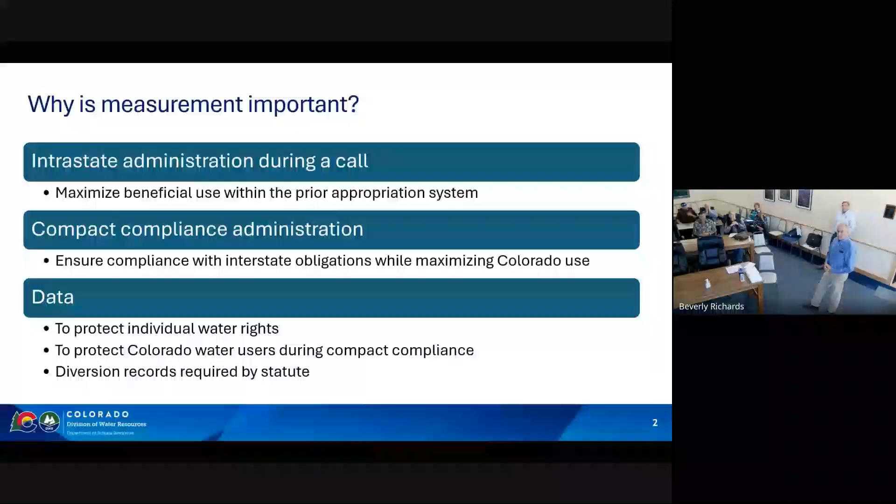So one question, I participated in most of the meetings in Division 7, the stakeholder meetings we did. And one of the questions you get is, you already have the authority to do this, right? So why do we need measurement rules? And yes, that's true. We can issue an order to somebody to install a measuring device. The statute in this section 37-84-112 directs that owners are responsible for installing measurement on their devices, on their diversions.

If they want to take water from the stream, because water is a public resource that's dedicated in the Constitution, that you get a right to use. But the thing is, in that language in the statute, it says owners of ditches, et cetera, shall erect measurement where necessary. And so this measurement rules process is trying to help define, in a consistent way, where it's necessary.

So that one that I just talked about, when or where is measurement necessary? In some of our divisions where we have groundwater measurement rules right now, like Division 1, which is the South Platte, Division 2, the Arkansas, Division 3, the Rio Grande, that where necessary has been answered for decades, because we have compacts that we do administration. We have very tight administration that occurs all year round. And so measurement has been required, and so we have more consistent measuring.

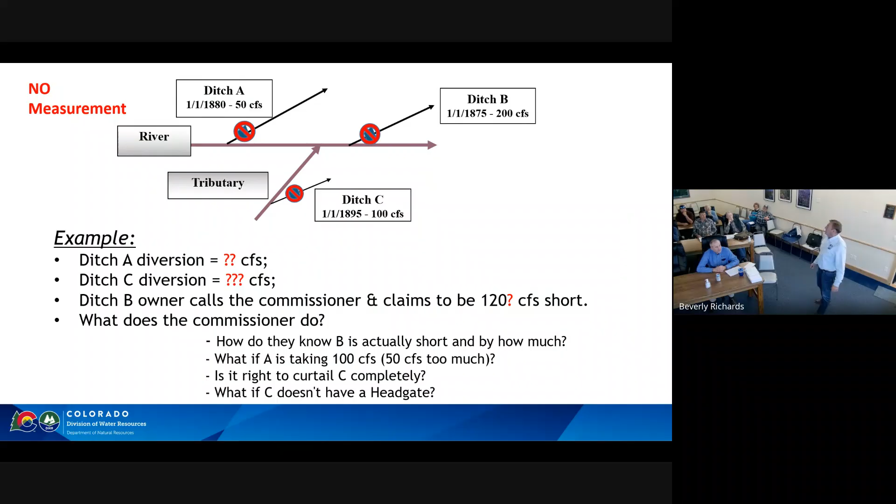To place a call, there's a standard for that. You need a lockable, controllable head gate. You need to be taking all the water that's available, and you need to measure. So you can't administer what you can't measure. Okay, so in this case, we'd say, I'm sorry, put in a head gate and put in a measuring device, then we'll talk. So go to the next slide, please.

What we could do in the past, and you've heard Jason mention this, what we would normally do is we'd write an order. I would write an order from my desk that says something to the effect, based on the statute you saw in a previous slide, 37-84-112: thou shalt put in a measuring device by a certain date, or we will curtail your water supply and we won't deliver any water. So we can shut them off.

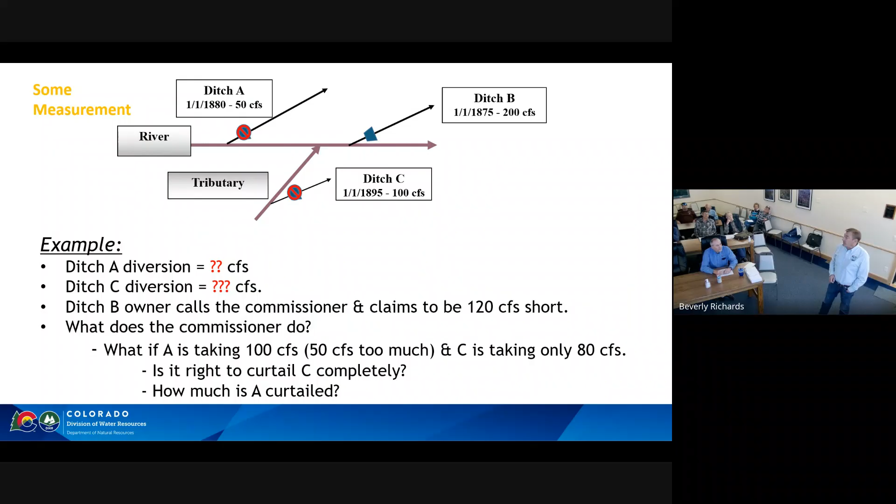The main point is that Ditch B is placing a valid call. It is conceivable that we might curtail these completely and then start letting the next guy in line start taking some water, to the amount that their water supply is available in the stream, but that's not efficient, and water commissioners are going to get a little grumpy in that kind of a situation. Next slide, please.

All right, everybody's playing ball now. Everybody's got a head gate. Everybody's got a measuring device. What a valid call by Ditch B. Now it's game on. Okay, we have 100 CFS water right at C. We have a 50 CFS water right at ditch A. So we're going to start curtailing C to the extent that B is satisfied.

You've got to have a measuring device and a lockable, controllable head gate. These measurement rules are really another way of getting to the point we need to be at on these streams, in lieu of writing orders, because we can write orders. You might hear a question: what if I don't put a measuring device in? Will you shut me off? Sure, that's an absolute possibility.

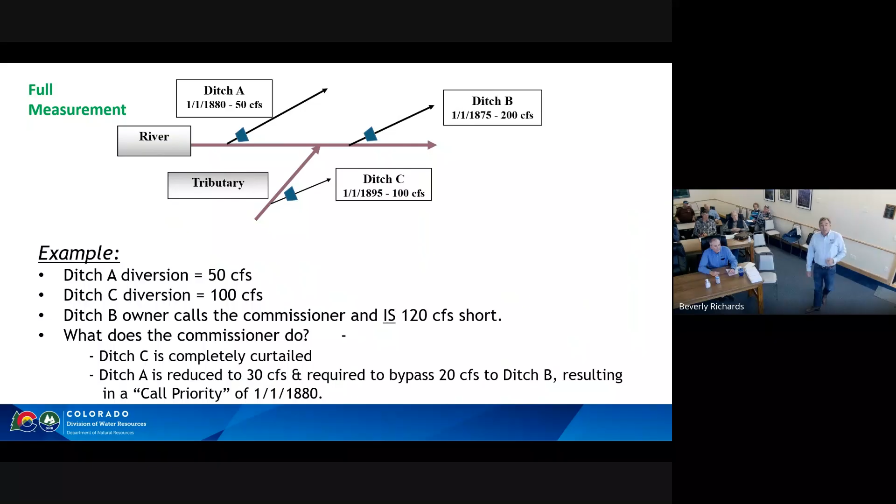So what do we need? We know your decrees. Our water commissioner is very familiar with who's on the stream. Every water right has a name, location, amount, dates, and uses, at a minimum those five things. If it's an irrigation water right, we need to know what that was decreed to irrigate—is it this 80 acres over in this quarter section? That kind of thing, and usually it's fairly specific in the decrees. Here in the Upper Gunnison, they did a really good job historically of defining what acreage is intended to be irrigated under this water right.

So you need a head gate, something we can actually control the water supply into your ditch, a measuring device, and the place of beneficial use.

Consider this: do you think it might have happened before in history that somebody placed a call for water to make sure their neighbor got shut off, then let the water run through a waste gate because they weren't ready yet? That's not a valid call, we would not honor that call. And he's not going to get away with it for very long, because everybody's always watching and you'll be ratted out quickly. So you have to put the water to beneficial use—that's part of the administration process, part of the great things that we look at.

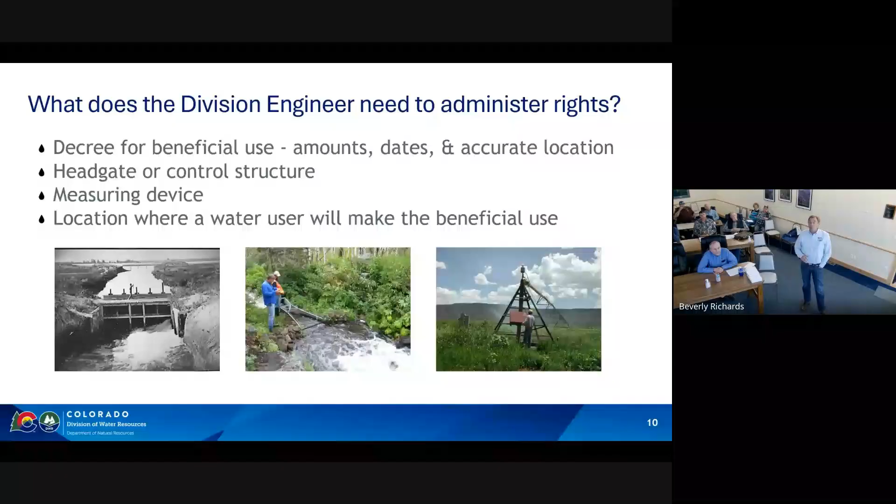So what is a functioning head gate or control structure? This is a really good one. What might be difficult to see is there's a chain hanging down from that screw handle. The way we'd lock a head gate: the water commissioner adjusts the flow into that ditch until satisfied he's got the flow right by reading the flume. So here's a proper head gate, here's a properly set flume, and that's a good setup right there. Then he'd run the chain through this structure and lock it, so you can't turn that wheel, you can't monkey with it.

Every stream system was settled differently, developed differently. Some stream systems, the water users get along pretty well and everybody's fairly honest, so we might not lock head gates on that stream. But another stream, maybe they don't get along that well, and we have to lock them all—it's pretty much one strike, you're out. If a water commissioner sets your head gate, puts a head gate notice on it, and it gets monkeyed with, there's no three strikes you're out. No, you blew it and you're going to get locked.

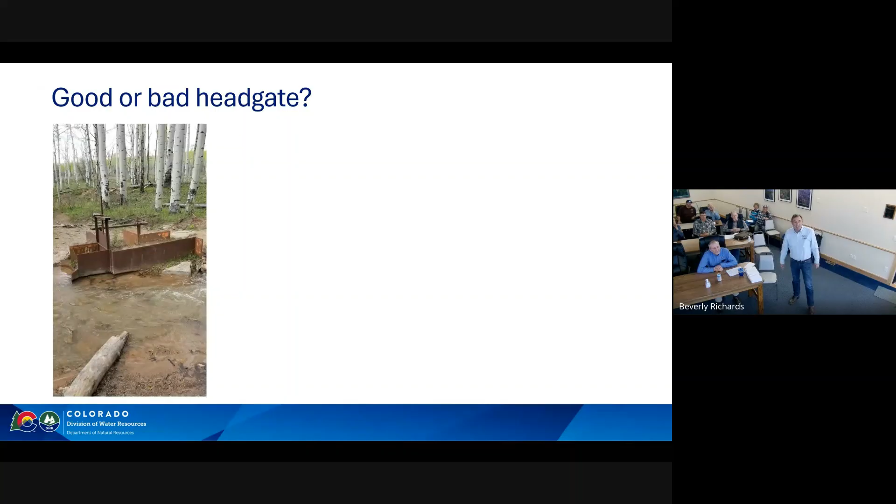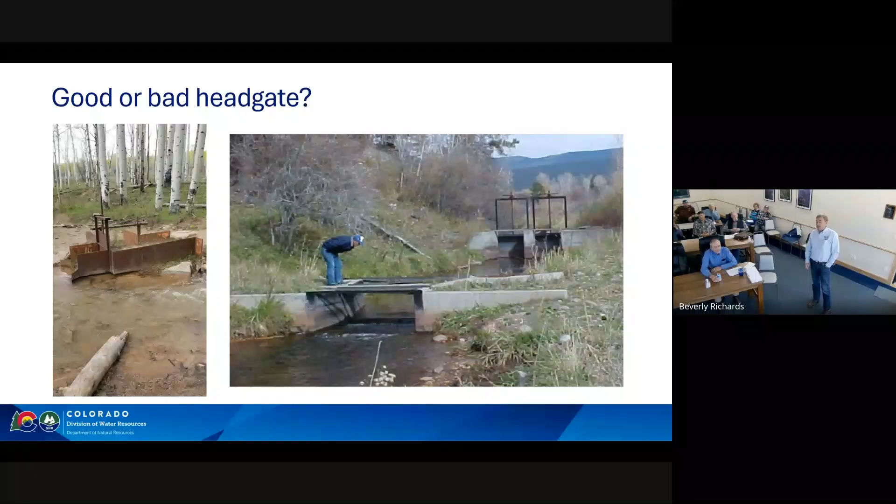Next picture please, and there's a good one. This is pricey. This setup here would probably be involved for a fairly large ditch company, and there'll be a lot of farmers being supplied by this system. What he's doing is trying to read the staff gauge on the other side of that wall. Speaking of staff gauges, go to the next slide please.

I think the next slide I'm thinking of is farther down. Okay, sorry, so take it away. Unless you want to keep going. No, you're doing great, it's fun listening to you. I don't know about that, but okay. We're trying to mix it up so somebody isn't talking at you for 45 minutes straight. Right, I have a tendency to put people to sleep, so.

These are three terms in the rules themselves. Measurement methods is the overarching term, covering all the different ways you could measure a diversion. Measuring devices is probably the biggest category underneath that. A measuring device is a physical piece of equipment, a flume, a weir, a meter that goes in the flow and has a relationship between either the velocity through the structure or the stage, like the staff gauge, and the flow rate. Alternative measurement methods don't have a defined relationship between stage and flow that is consistent. Measuring devices is the most common way people measure their flume or diversions, but there are some alternative measurement methods that are acceptable.

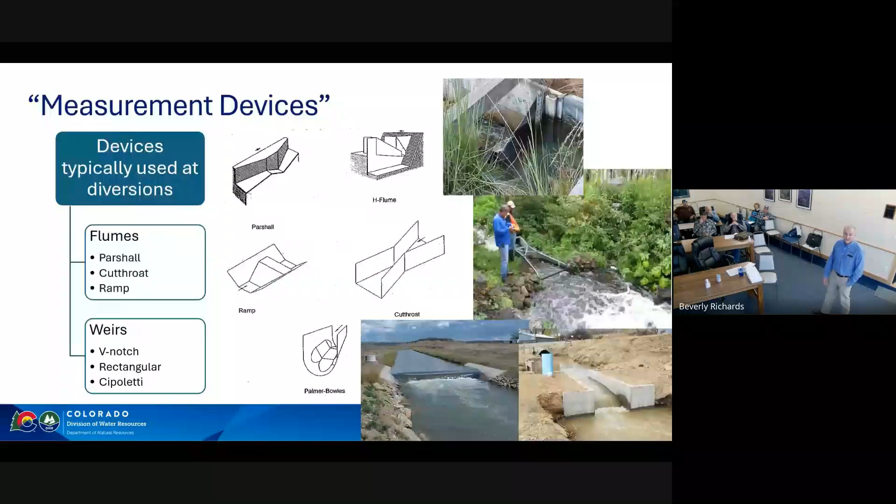Once you have your flume, and it's one of these common ones with a good rating table, it doesn't work so well if it's not properly installed. So the measurement rules address proper installation and require it to be maintained, because this one might not be measuring all the water going through it, or might not be measuring any of the water going through the flume. They need to be installed properly and maintained. Sometimes it's just a matter of cleaning down below, because buildup can cause it to overtop the flume or back up in a way that submerges it. But the measurement rules require proper installation.

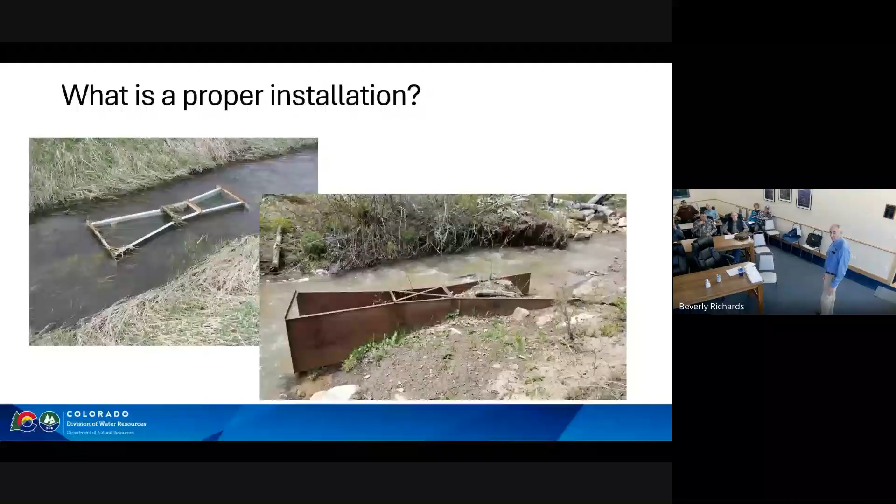So we have a test here for people in the room. The water commissioners last night answered all the questions, so hopefully you will too. Which one of these is working? The one on the right works, correct, good job. In this picture you can see a lot of water going around the flume. The working one has calm water behind it and fall through the flume. Typically flumes and weirs have to cause the water to change from subcritical to supercritical depth, the engineering term, because that's what creates the relationship between stage and flow. So if you see a flume that's submerged, that's why it doesn't work.

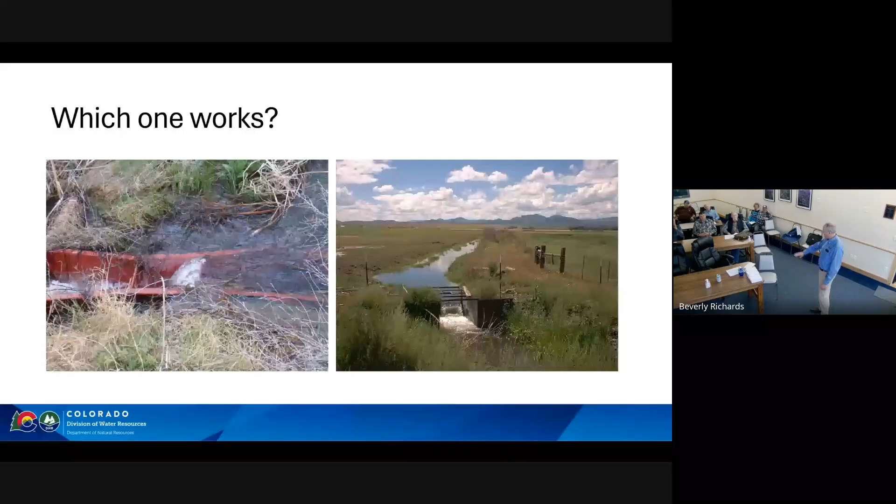Next slide. So which one here? The one on the right. Yeah, okay, that one has fall through it and a good staff gauge. The other one is completely submerged and it's just like a flat ditch running through it. So, next slide.

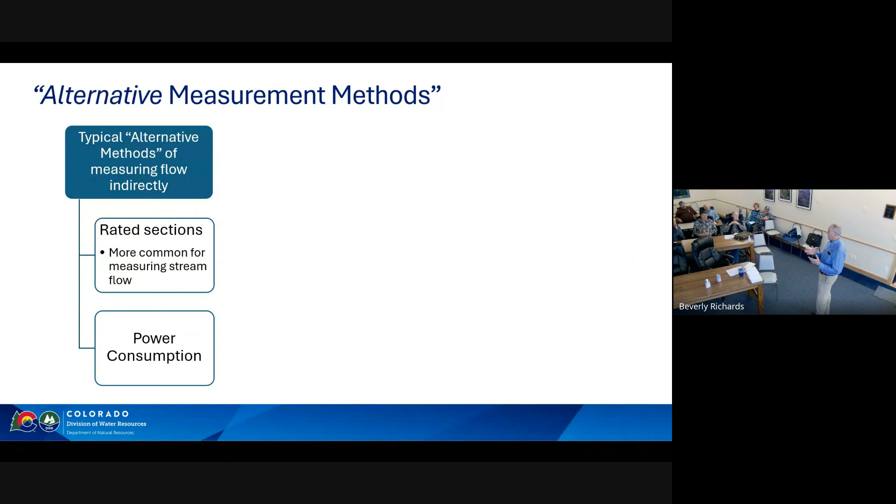So what are some alternative measurement methods that would be acceptable? The most common one is probably a rated section. Sometimes we have ditches that don't have enough fall to actually put a flume in, so in some places we've done a rated section where the user measures it many times and develops a curve of stage in the ditch equals this much flow. Usually we require that to be in a trapezoidal section or some very consistent section that's not going to change.

This is somebody out in the stream measuring the stream, and that's how we would create that rating table. It's also how we verify structures are accurate, by actually going out and measuring. So he's making one of those measurements.

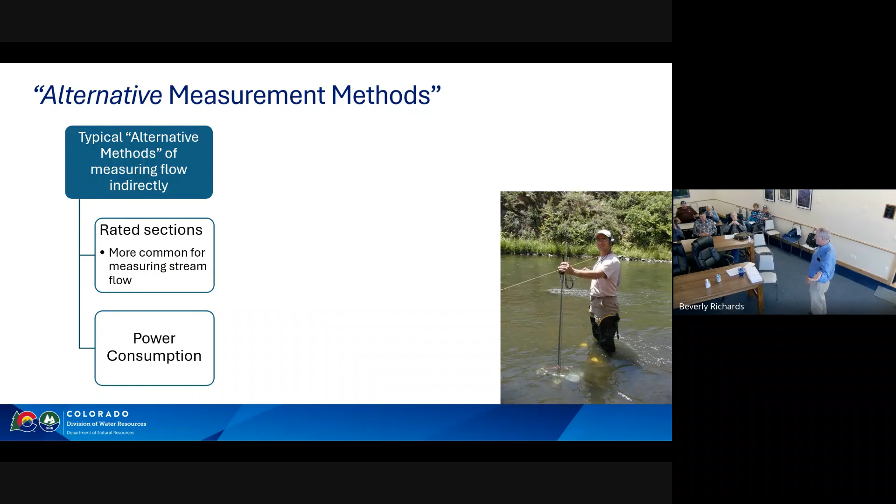So the water is at that level, he gets a flow rate at that level, and then goes out another time when the water level has changed. That's how you develop that relationship. But it's more common for measuring streams, because a lot of our streams don't have flumes on them, but it does get used on some canals.

There's the slide Bob was looking for. So here's your staff gauge. On the right, that's a nice, clear picture. At the top of the photograph would be 1 foot, so this is in tenths of feet, and this 5 actually represents half a foot.

So 50 hundredths, and you can see that line at 5 has a nice little angled tip. The top part of that black line is actually 0.5. As you cross the blank white space and hit the bottom of the next black hash, that would be 0.51. On top of that black line would be 0.52.

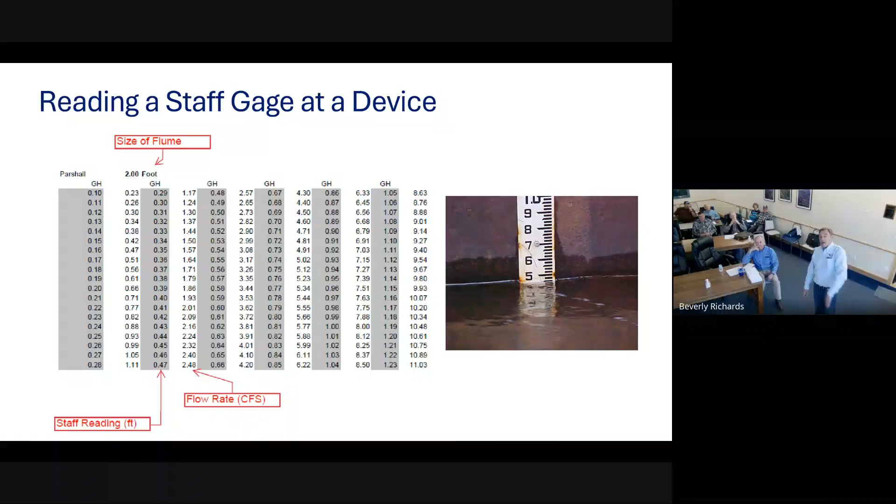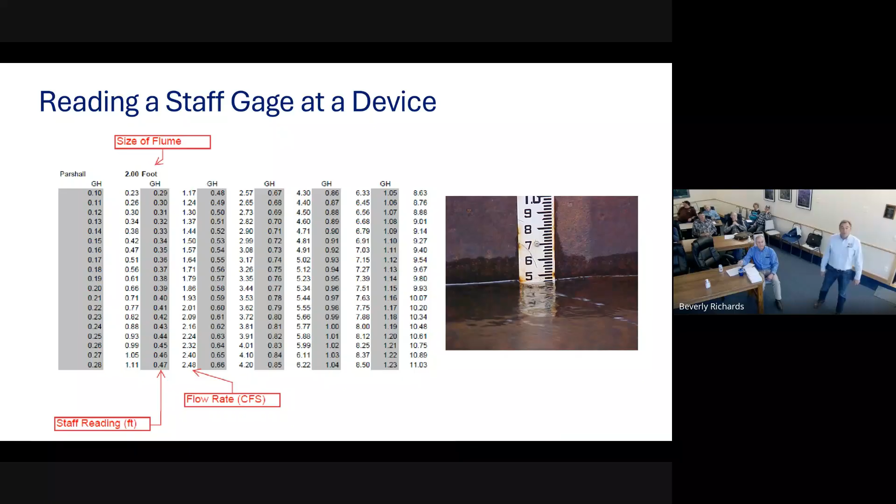So what I'd say right here is this is about 0.47, and this is a 2 foot flume. On this table, if you go down to the gauge height of 0.47, that corresponds to 2.48 cubic feet per second, if that flume is set correctly and you have proper flow through it. Jason will talk more about the accuracy of flumes and what we accept for measuring devices. Anyway, that's how you would read the staff gauge, they all work exactly the same way.

So why do we record and report all these diversions? Jason mentioned in the beginning, we're required by statute to make a record of all the diversions of water in our division every year and publish that.

It's valuable to the user because of the value of your water right. Have any of you been to Aaron Clay's water law in a nutshell training? One of the first things he says is that the value of your water right is based on the use. And how do you know how much water you've used and are consuming unless you're measuring that?

So it's very important for maintaining the value of your water right. It also protects against abandonment. You'll never be on the division engineer's abandonment list if you're demonstrating diversion records with no breaks ever.

And also for optimizing operations. If you know precisely how much water you're diverting and putting out onto your field, that's better for your operations.

As far as the system goes, the state of Colorado is very interested in protecting its entitlement under the Colorado River Compact, and being able to demonstrate to lower basin states under the compact what our use of water is, that we're within our entitlement under the compact.

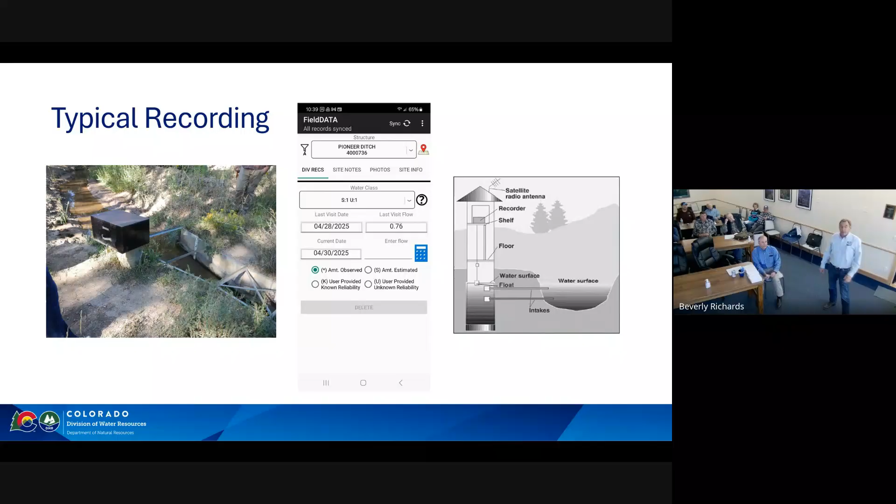And then finally, like Jason was explaining, we might have a stream gauge. There's also gauges on canals and ditches that are recording the flow in the ditch, canal, or stream 24/7. They have instrumentation and telemetry that automatically puts that into a database, and that data can be viewed with various web tools, and it's pretty transparent as well.

Next slide, please. Reporting.

Typical reporting types. Reporting is done, and that data is put into our reports in places you can access through online web tools, but it's done various ways. The brute force way is a water commissioner literally making a visit to your flume, reading it, maybe putting that in his app and getting the data up. I explained how a stage discharge recorder works, where the water commissioner downloads that data onto his laptop, and then that gets into the database. Another way is electronically, through telemetry, like the gauges installed on a stream, ditch, or canal.

Those are expensive. They require highly trained hydrographers to get them calibrated and working correctly. And then there's user supplied data. This is new for me, and it's done commonly in divisions 1 and 2, and I suppose 3 too. You can get an account, and through what's called REST services, you can log on to our website and have your own portal where you can upload your user collected data. It gets reviewed, and once it's reviewed, it gets accepted. So there are multiple ways that data gets reported.

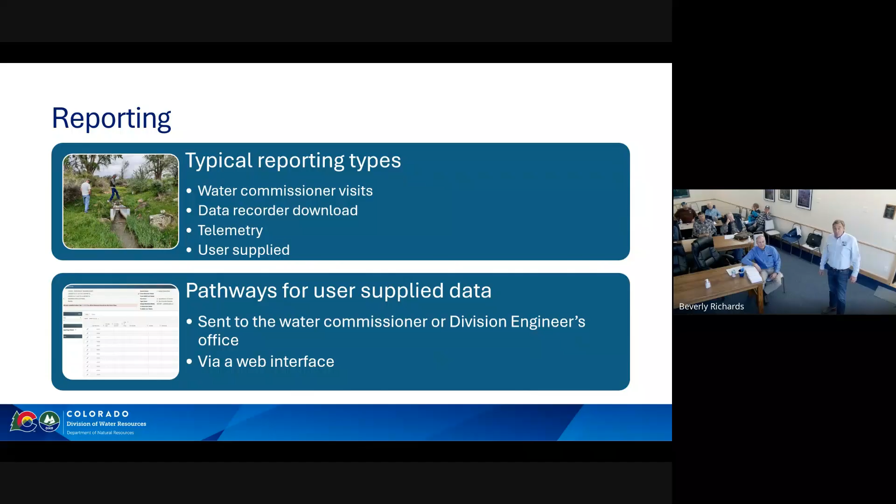I'm going to talk about the legal process for these rules, specifically the water court process. Right now we're in the stakeholder process.

Right now we're in the stakeholder process where we're going out, we're here presenting the drafts of these rules to you all, their purpose, their need. But once that's finished, there's going to be the water court process.

What's going to happen at the end of the stakeholder process is that the state engineer signs the rules, and then those get filed with the water court. We're then required to post notice of the rules in the water court resume, as well as in local newspapers, so people know what's going on.

The second month after those notices are published is the deadline to file protests to the rules. And then that sets up the whole court process.

Once those protests have been received, we're going to be asking the court to set case management orders for deadlines, things like expert reports. Ideally what we try and do—we've done this in 6 and we've done in 7, we've gotten a handful of protests—and ideally what we've been able to do is reach those through settlements, through stipulations, and that's the desired outcome.

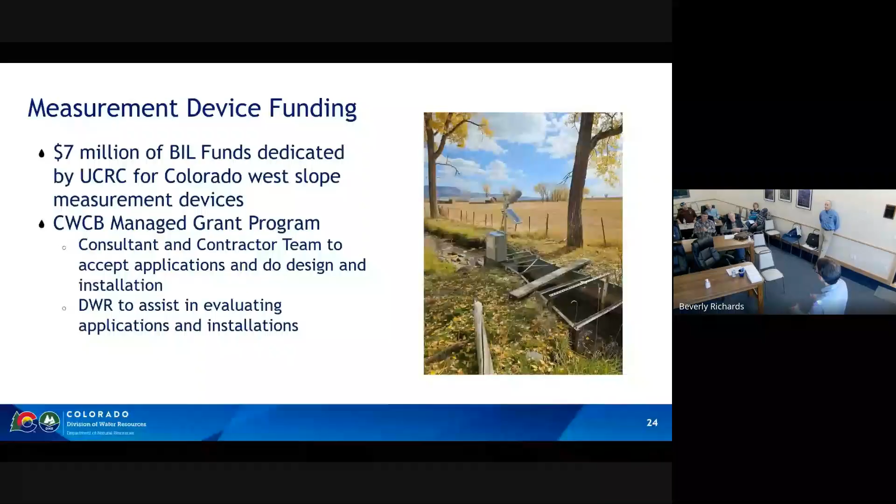The way that process is going to go is that the funds would be given to the CWCB. They're going to go through an RFP process to get a contractor on board for the installation, for the management of the project. And then we'd be doing some outreach, some advertising. People would have an opportunity to apply for the program, and if that application is accepted, that measuring device would be installed for you.

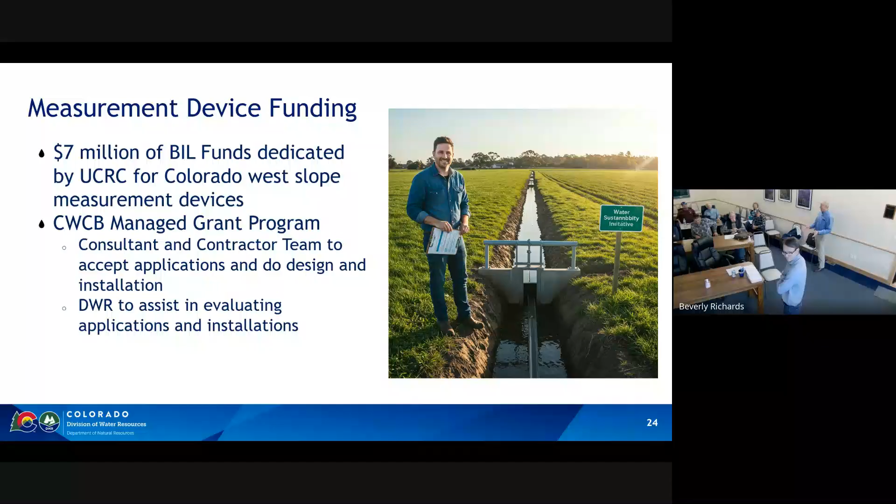And similarly, sorry, we could take those pictures out. It's kind of, it's okay.

So like I mentioned, the next steps are in that stakeholder process. This is the second one. We were in Delta yesterday, and we'll be in Norwood and Montrose next week.

We're asking for comments on the rules. Those have been posted, and Marie has a written form you can use online to submit comments. We'll be providing the contact information on the next slide. Again, I'd stress if you have those comments, do those now. We're asking for them to be submitted by May 31st.

May 31st - I think, how many days are in May. But yeah, so that way we can move forward in addressing those comments. If we're looking at those comments and thinking these make a lot of sense, we should make some revisions, we'll repost the rules and let folks know about it. But if things are looking pretty good, and we've gone through this process in 6 and 7 made appropriate refinements, we'd move forward in that water court process.

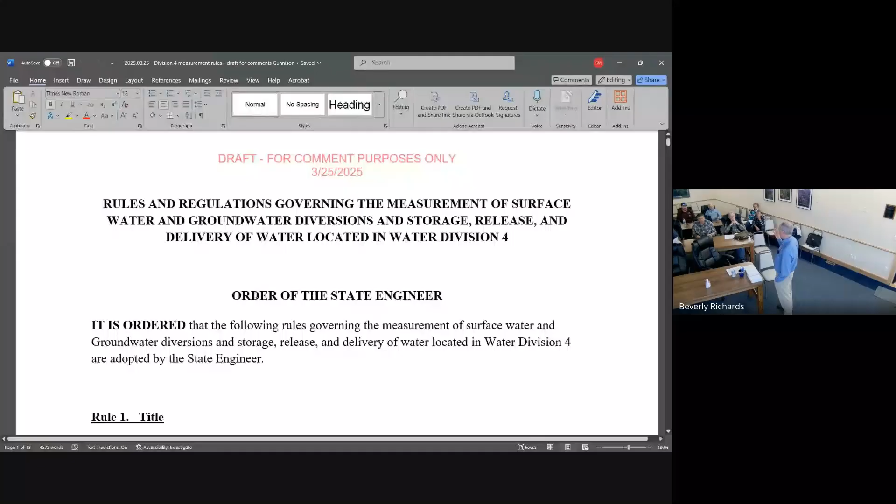We have some people here today, but I know that you probably have folks that you interact with out on the stream system that would be interested in learning about this. We would like to have as many people review these and provide comments as possible. This video of tonight's meeting will be posted on our website, so Sonia, you could share it with whatever lists you have, if they want to watch, so that they get the picture of what we're doing before they want to make a comment.

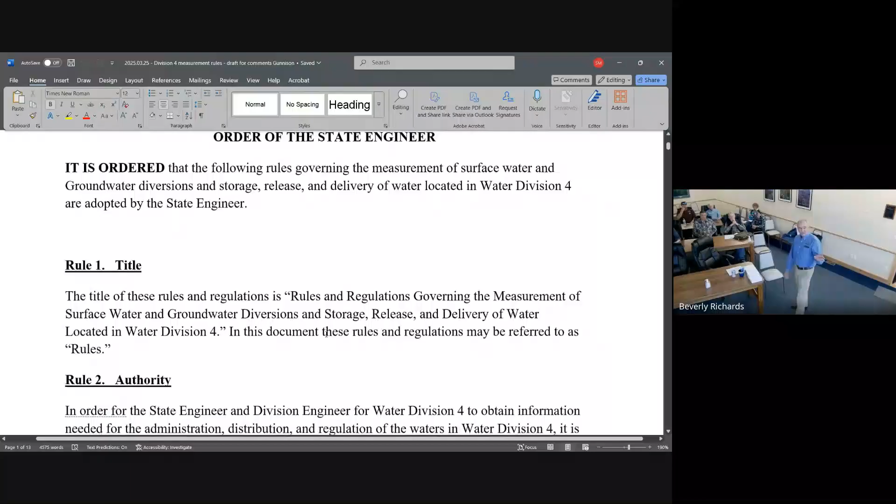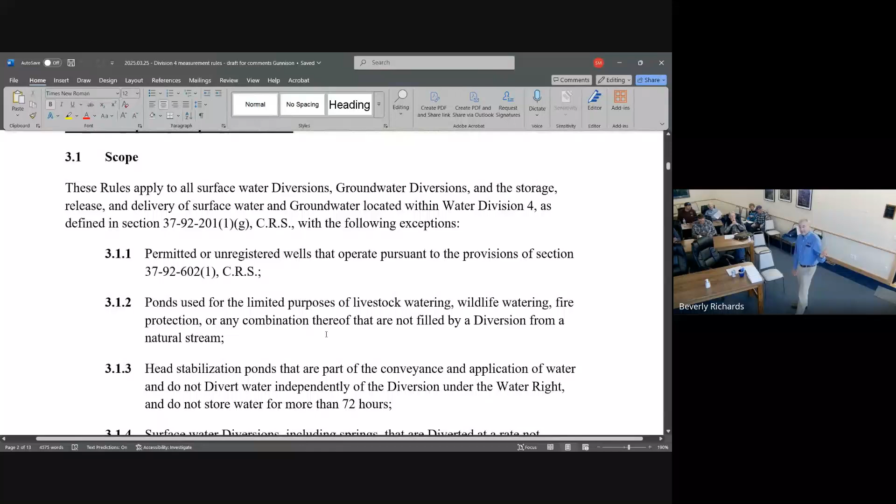Please ask questions as you have them. Don't wait till the end, because this is a good chance for you to get those questions answered or comments.

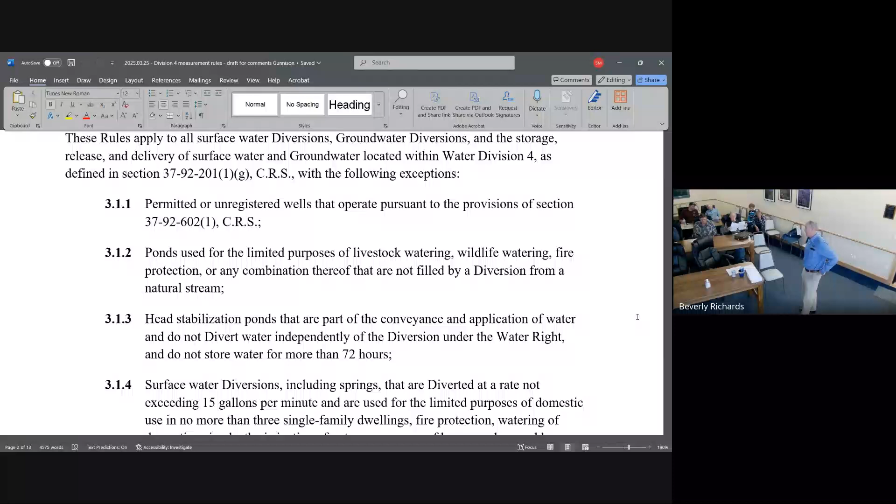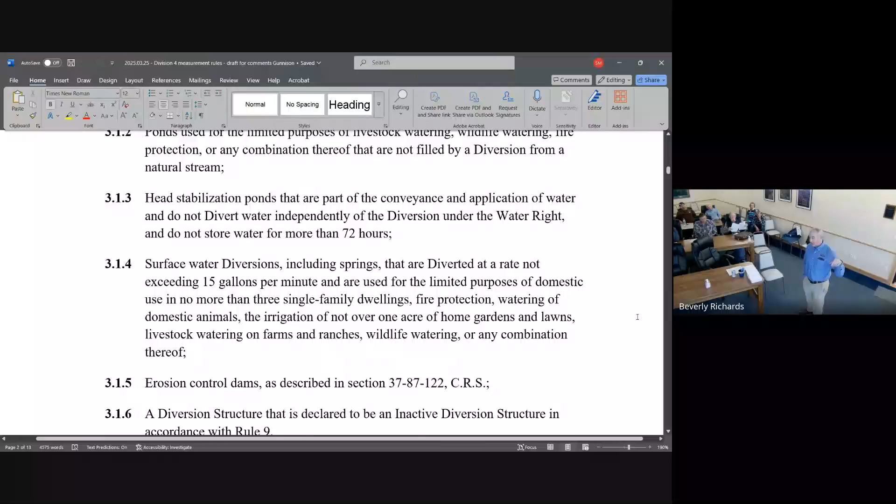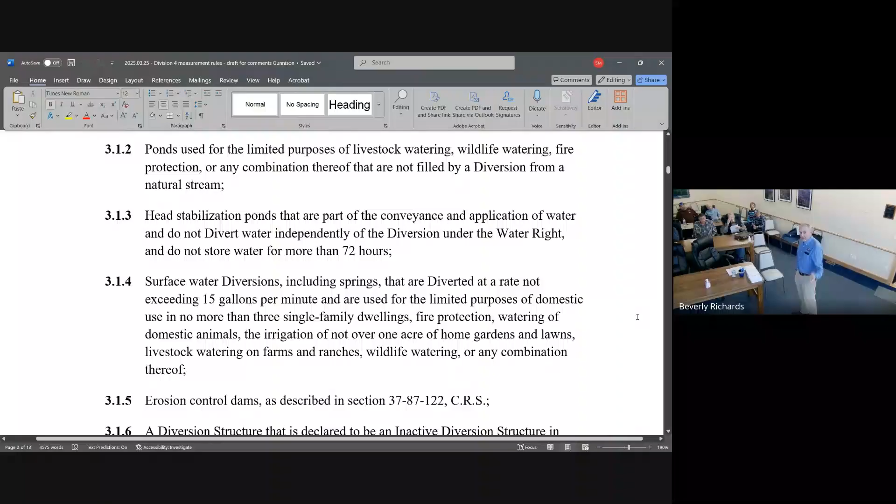3.1.1 is the exemption for exempt wells for domestic purposes. 3.1.2 is the exemption for ponds used for livestock watering, wildlife purposes, and fire protection purposes. 3.1.3 is head stabilization ponds, which we didn't talk about earlier.

If you have a pond in your ditch system that you use just to basically equalize the head, and it's part of your operations and doesn't store water for more than 72 hours, you don't need to put measuring on it to tell us what's in your equalization pond.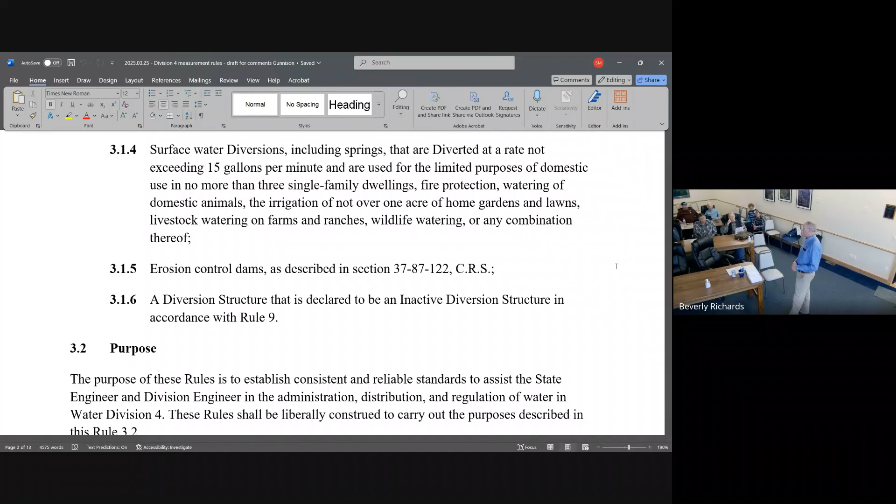Springs that are not diverted at greater than 15 gallons a minute and are only used for the same things that an exempt well would be used for - recognizing that a lot of those supplies for homes off of springs are similar to exempt wells - don't need to be measured.

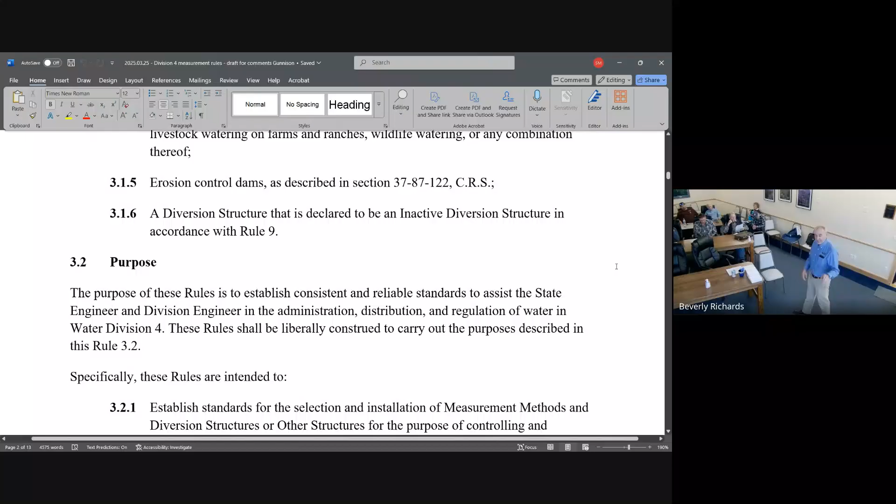And then erosion control dams, and any diversion structure that's declared to be an inactive diversion structure in accordance with Rule 9. In Rule 9, we'll talk about the process by which, if you're not going to use a structure and you don't want to get a notice that you don't have an adequate measuring device, you could file with the division office to make it an inactive structure.

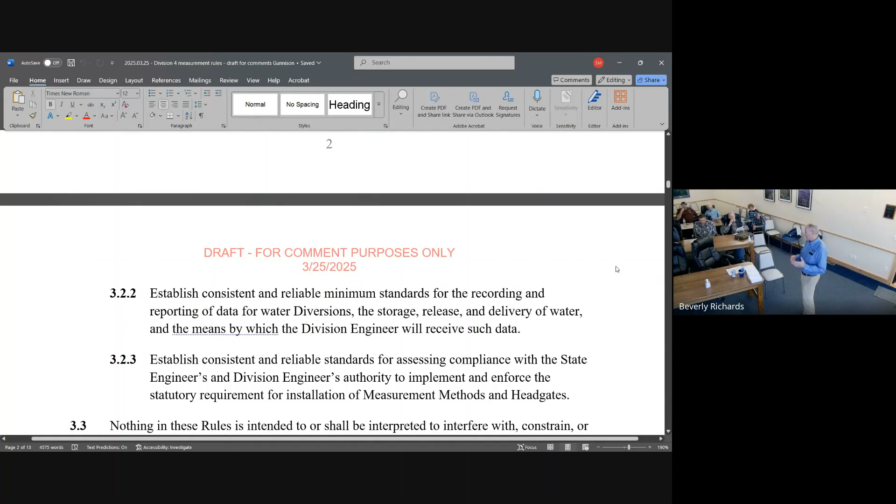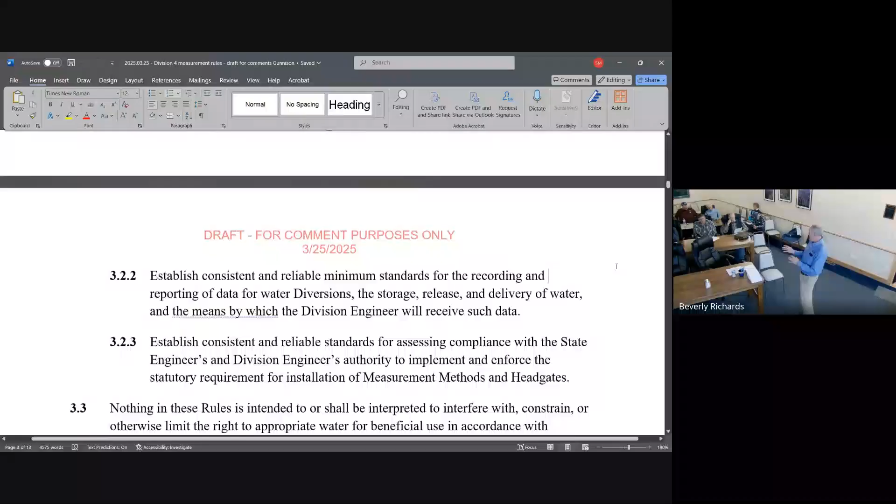So the purpose, I think we've kind of covered this, but really it's to establish a consistent and reliable standard that we go through a stakeholder process to create. So people have an understanding of what the division engineer expects you to have if you're taking water from the natural stream.

The statute gives us the authority, but it doesn't give very clear direction on what we would expect. So Rule 4 is definitions for things. We don't need to cover all of them.

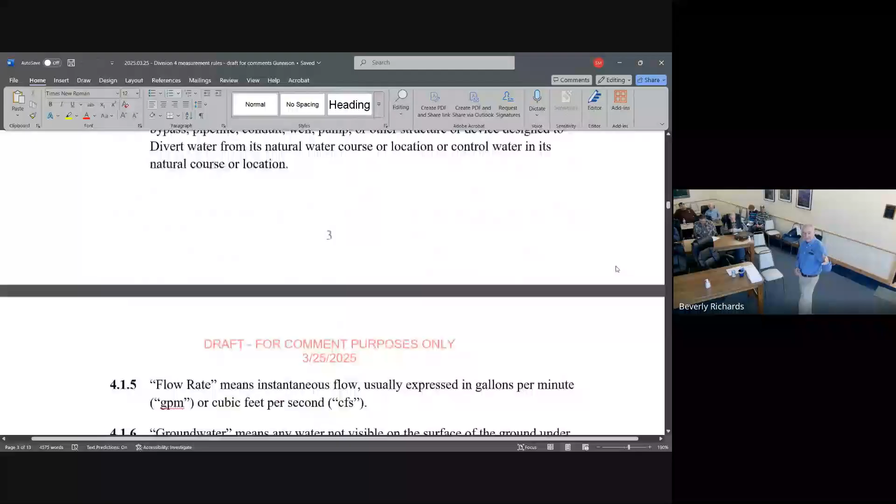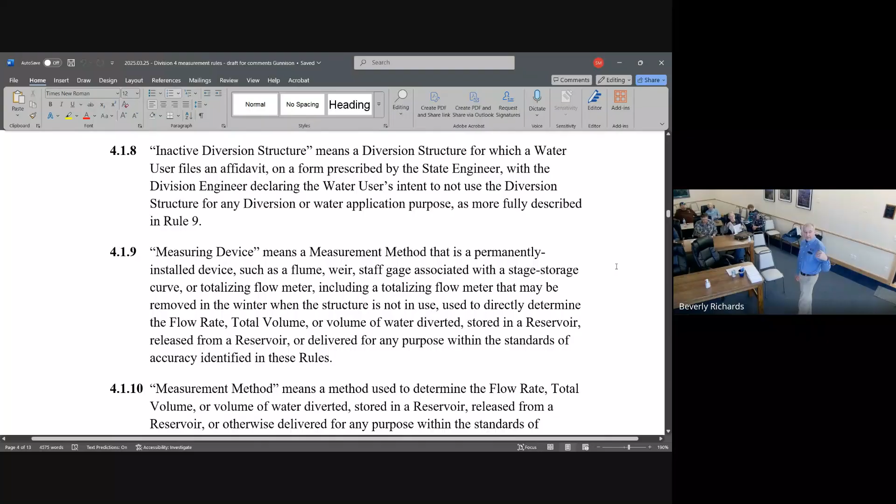We talked about alternative measurement methods. The structure is pretty obvious, the structure used to divert water. There's a couple in here. So inactive diversion structure is specifically defined as something that you have filed to be inactive. We already covered measurement devices and measurement methods.

On-stream reservoirs and off-stream reservoirs, we will talk about those in a later Rule 6.

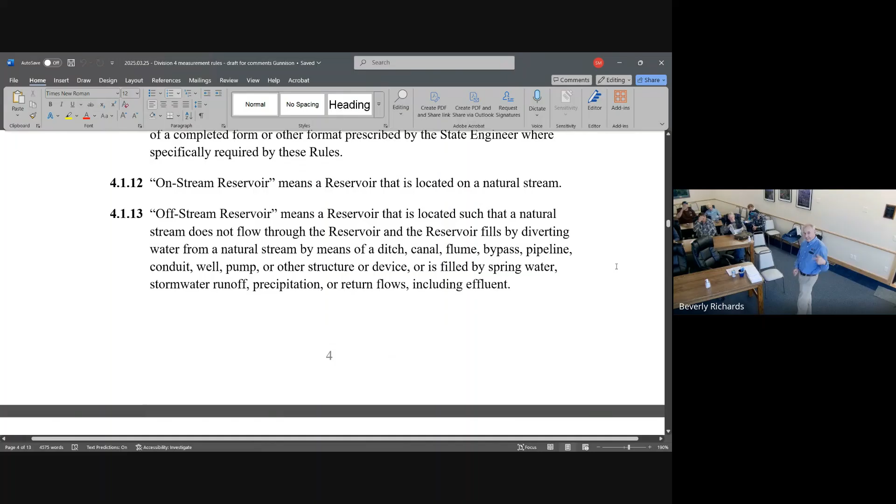So other structure is the question we had last night, related to another question we had last night. So if you have a ditch that takes water and then dumps water back to the stream at some point downstream, or there's other structures used to operate that we would need to know the amount going through them in order to administer the river properly, that's what other structures cover.

So if you have a wasteway or something that we would need to know how much is being wasted out of it. We have in some divisions a lot of augmentation stations that are required to deliver water back to the stream, and so that is kind of a nod to that too.

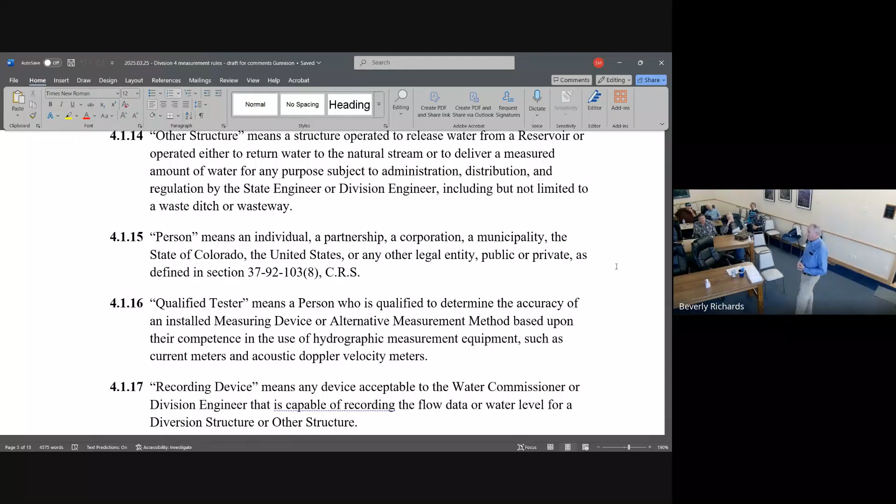A qualified tester is basically anyone who is qualified to go out and actually do what that guy in the stream was doing, and measure with a device what is flowing through a ditch or a stream.

Our hydrographers that work for the Division of Water Resources are obviously qualified. A lot of the measurements our water commissioners do, if Tom looks at a structure and says he's not sure if this is accurate, he may ask our hydrographer to come out and measure it to verify whether or not it meets the standard, which we'll get into in a second. You could also, as a user, hire somebody, a consultant, to come do it, as long as they are qualified to use those devices.

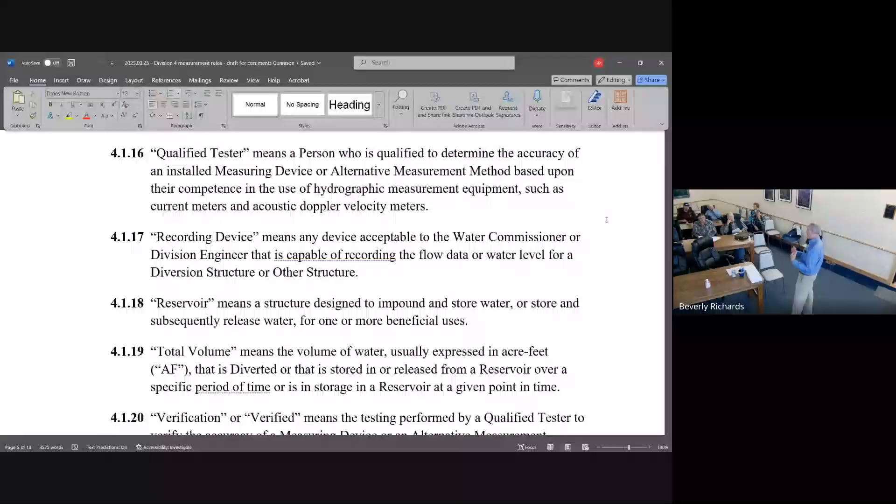We would evaluate that when they submit their measurement to us. We're not doing some certification program for qualified testers. Total volume is pretty self-explanatory for water users.

So I think we can go to Rule 5. The headgate requirements are in Rule 5. This is fairly short, but it's really important, because as Bob was stating, we can't administer water without a headgate, really.

I mean, we have places in Division 4 that I'm aware of from my time here where there's no headgate. And so people expect us to go out and shovel in their ditch when the river goes on call. Well, I don't have enough money to pay for a backhoe for all of my water commissioners.

So a headgate is important so that they can actually lock and control the flow going into your structure. So this defines that, short and sweet, that you must have a headgate that allows the water commissioner or owner, at the direction of the water commissioner, to accurately adjust the diversion of water with reasonable effort. So if your structure is pretty much stuck shut and has been stuck shut, or is welded shut, that doesn't count.

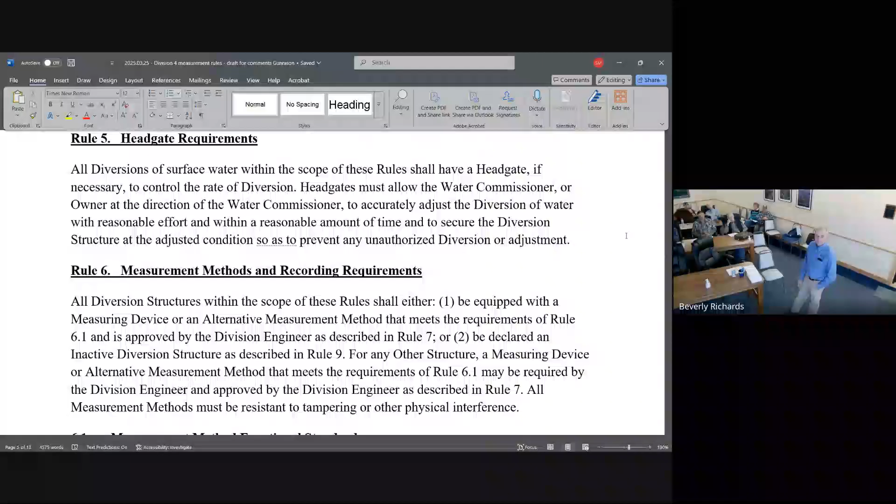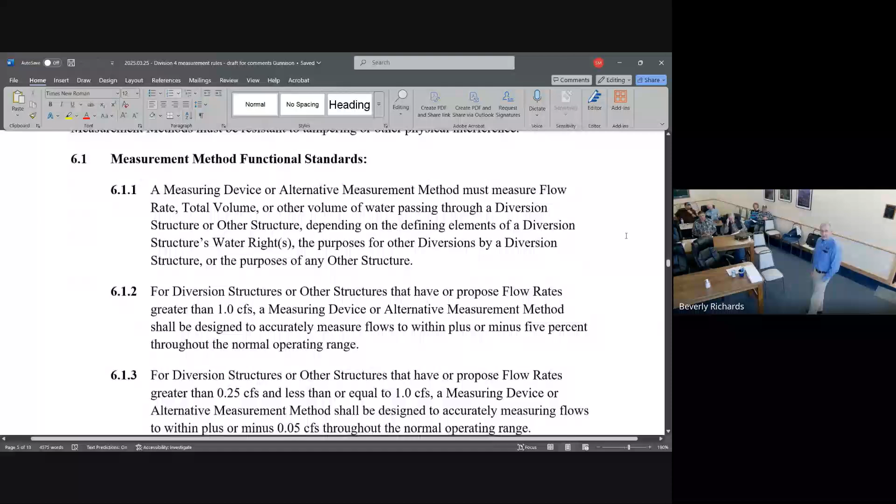So Rule 6 is all about the functional standard for these devices. What accuracy do we expect when you install a structure? Obviously those pictures of flumes that weren't in the stream are not accurate.

In 6.1.2, for diversion structures greater than 1 CFS, or with proposed flow rates greater than 1 CFS, a measuring device or alternative measurement method has to be designed to accurately measure to within plus or minus 5%. That's the standard for the best we could measure if we went out to verify your structure - the most accurate we could be is within plus or minus 5%. So that's where that comes from.

As you go smaller in device structures, for diversion structures between 1/4 and 1 CFS, they have to be accurate to within 5/100ths of a CFS. That sounds really small, but it's actually bigger than what 5% would have meant for that flow rate. That's why we changed from a percentage to a CFS amount.

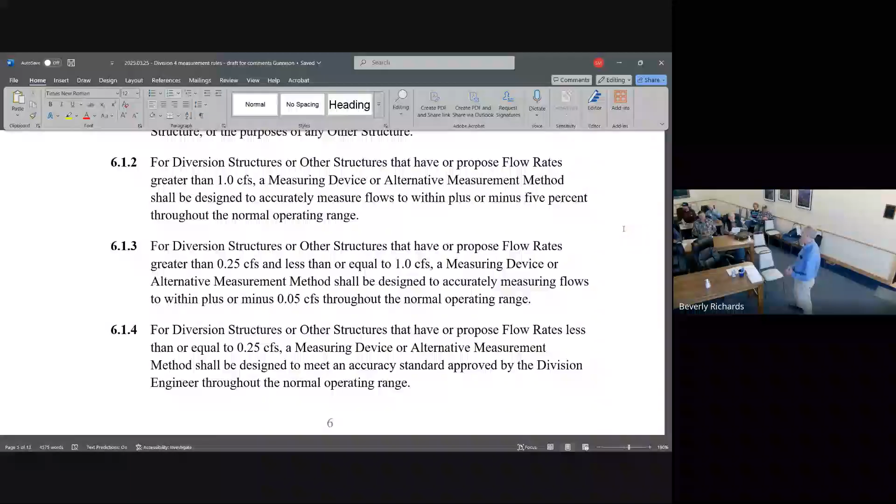For diversion structures less than 1/4 CFS, you've got to talk to Bob - no, it's an accuracy standard approved by the division engineer through the normal operating range, because it becomes difficult to set a specific percentage standard for that small of a diversion.

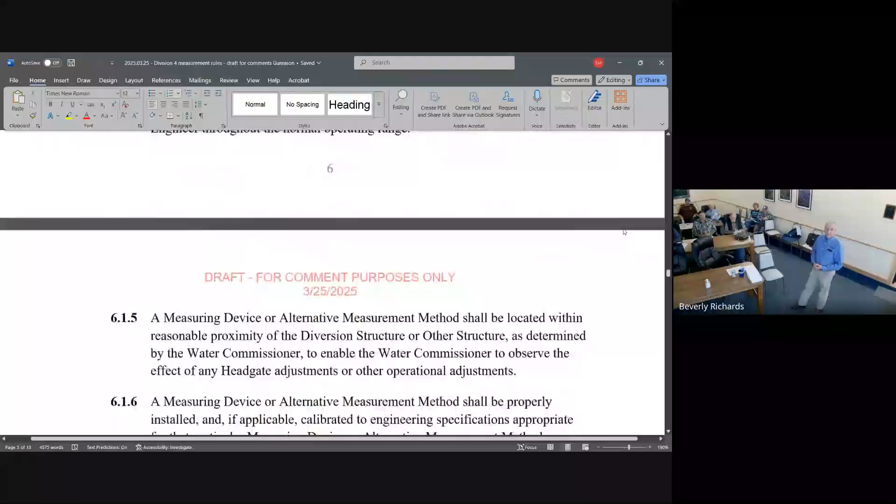Then 6.1.5 says it must be set within reasonable proximity of the diversion structure - that's the reasonable time. And 6.1.6 says it shall be properly installed - meaning it needs to be maintained and installed properly.

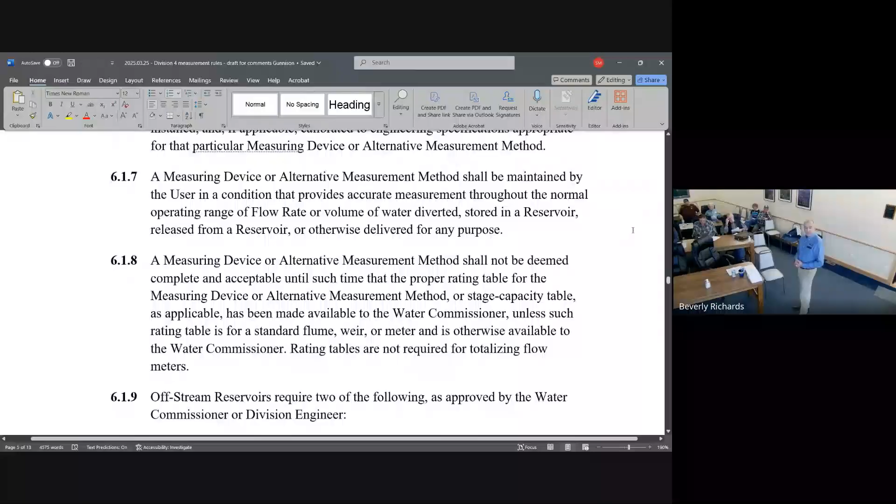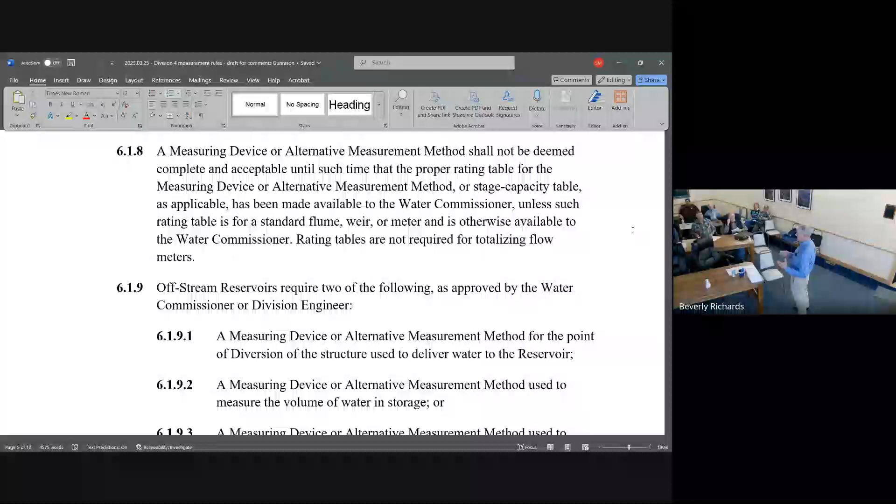You have to have, in 6.1.8, a rating table for it. A Parshall flume has a standard rating table - we don't need you to provide us a special rating table for that. But if you put in a ramp flume, those are custom. If you put in a cutthroat flume, we don't have those rating tables. You would need to provide them to the division engineer's office or the water commissioner so they know how to measure the water in that structure.

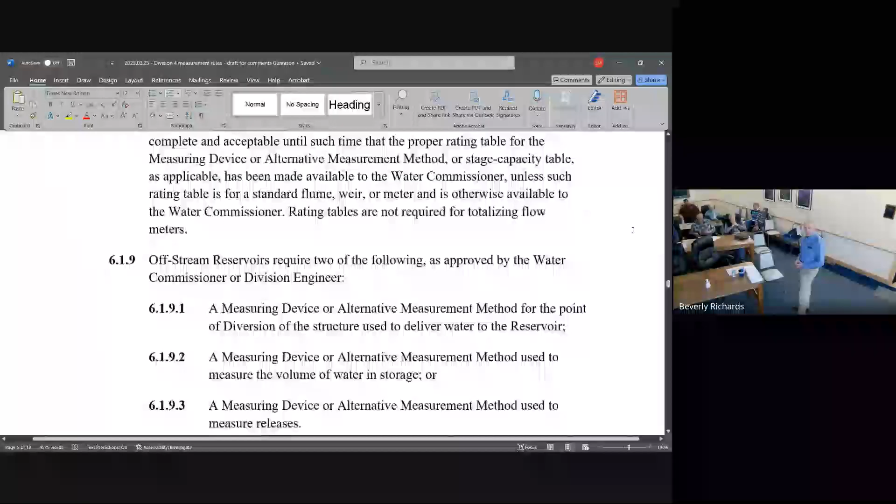So here's where we talk about the difference between an off-stream and an on-stream reservoir. An off-stream reservoir is one that does not sit on a natural stream, so there's no stream flowing through it. It's off the stream, and maybe there's a ditch that delivers water to it, and then you release water back to the stream, or pump out of it to make use of it for irrigation.

There are different requirements for the two types. The primary difference is that for an on-stream reservoir, in 6.1.10, you need an outlet that can pass the inflow. If the commissioners are administering the stream and you're out of priority, they need to be able to send water out of your structure to downstream seniors in an amount that equals the inflow.

Both on-stream and off-stream reservoirs require 2 of 3 different measurements. If you have a reservoir with water coming in on one side and going out on the other, you need to measure 2 of: the inflow, the outflow, or the volume, so we can do the mass balance. If we know the outflow - say you have a flume releasing water to the stream, plus a stage-capacity table and staff gauge telling us how much water is in storage - we can back-calculate what's coming in to make that diversion record. If you have the inflow, and there's only one source of inflow, plus the storage, we can calculate what was going out. So 2 of those 3 are needed.

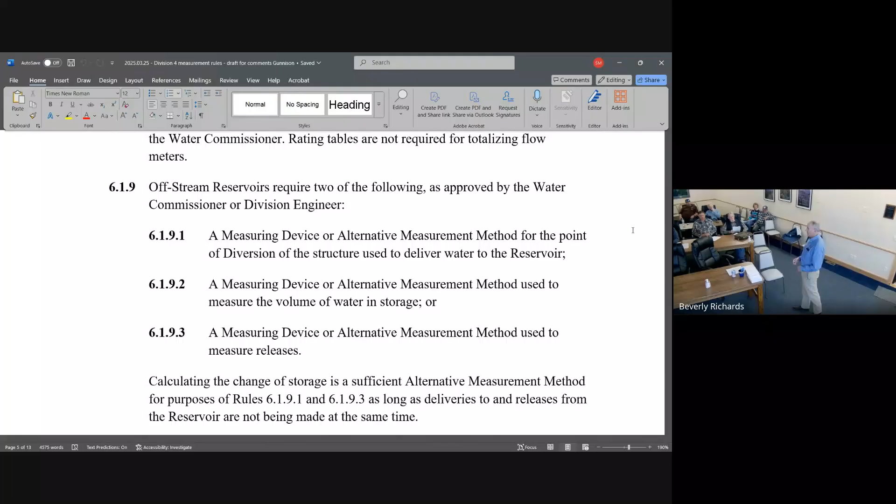For an off-stream reservoir, there's a special provision if you only take water in the spring - this is common for augmentation ponds. You put water in during springtime so you can augment something in the fall or later summer, taking water in and releasing it later when there's no water coming in.

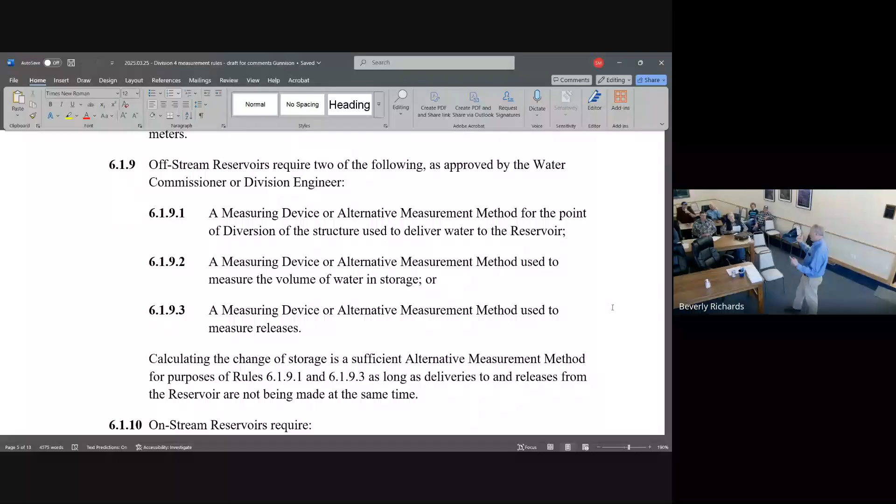You can do that with just the volumetric measure, because we can tell how much is going out or coming in by how much the volume changes. But once you introduce water coming in and going out at the same time, you can't do that anymore. So we would record that as an annual total. You wouldn't see something taking place all year long, you'd see one record that says 20 acre feet. So the volumetric measurement is okay in those situations.

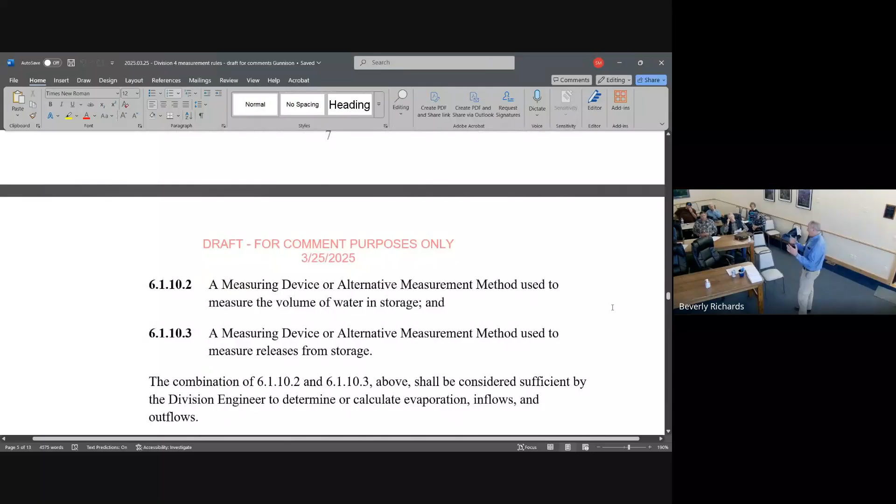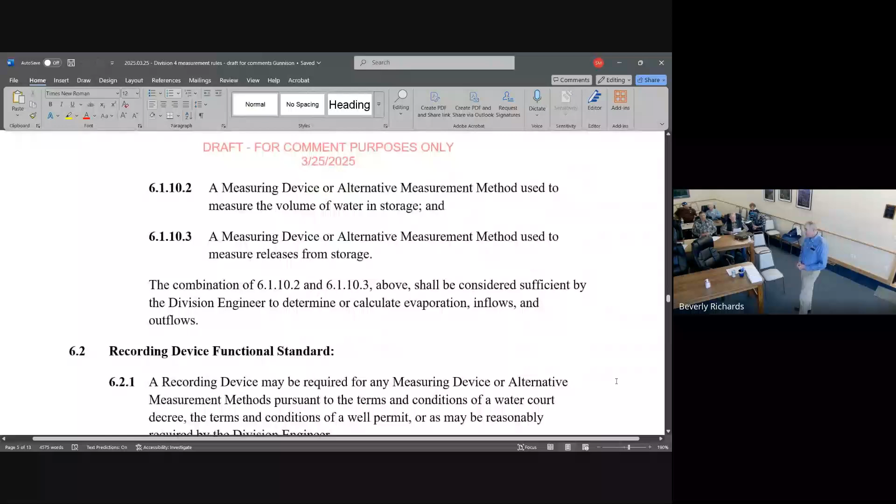You also have the telemetry measurements. We don't have in Division 4 very many places where we have actually required a recording device, but the state engineer and division engineer do have the authority to require it if it's necessary to administer. In Division 1, which is the South Platte, almost everything has a recording device on it because of how tightly the administration occurs - all of the exchanges and crazy operations that occur to make sure water is not used out of priority requires it. In Division 4 and most of the West Slope divisions, we don't require it unless it's a Trans Mountain diversion where we have to have a really good record because we make reports to the UCRC on what water is taken out of the Colorado to other areas. Or maybe you do have an aug plan that you need that continuous record. But I guess the point is if we did need it, we could require it.

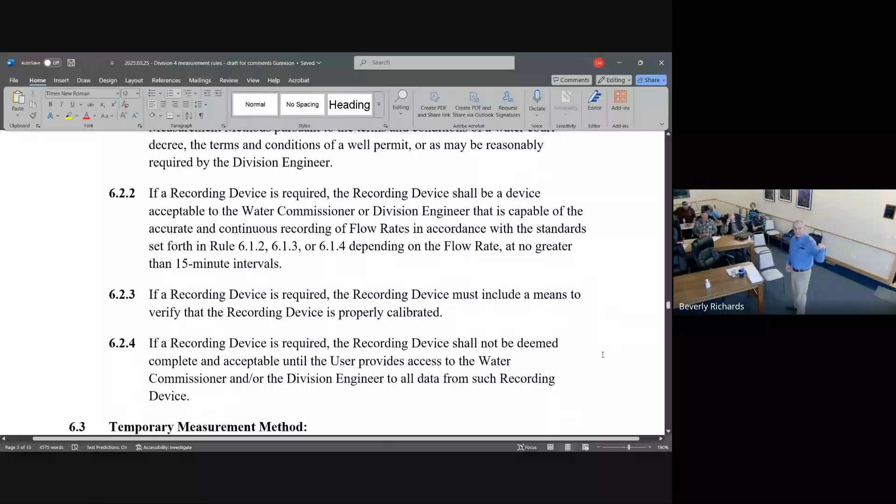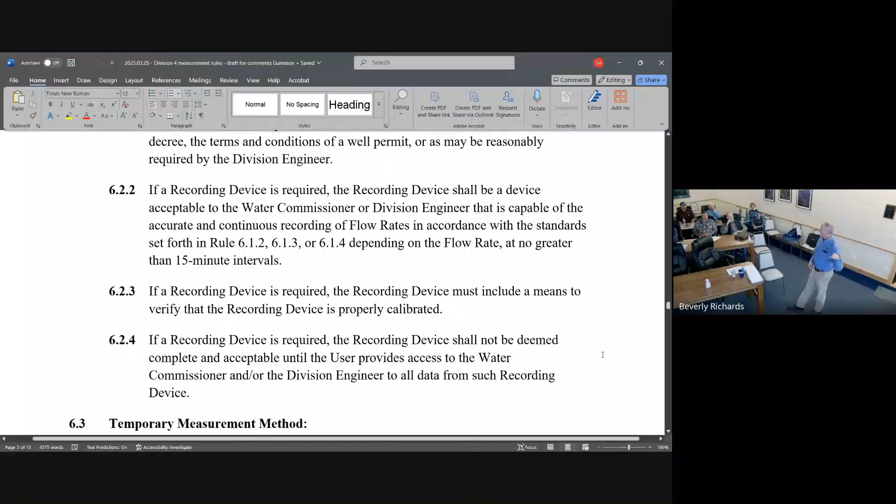This sets the standard for what would be required, 15-minute intervals. So we can't require you to give us a 1-minute interval. It has to be a 15-minute interval as the minimum.

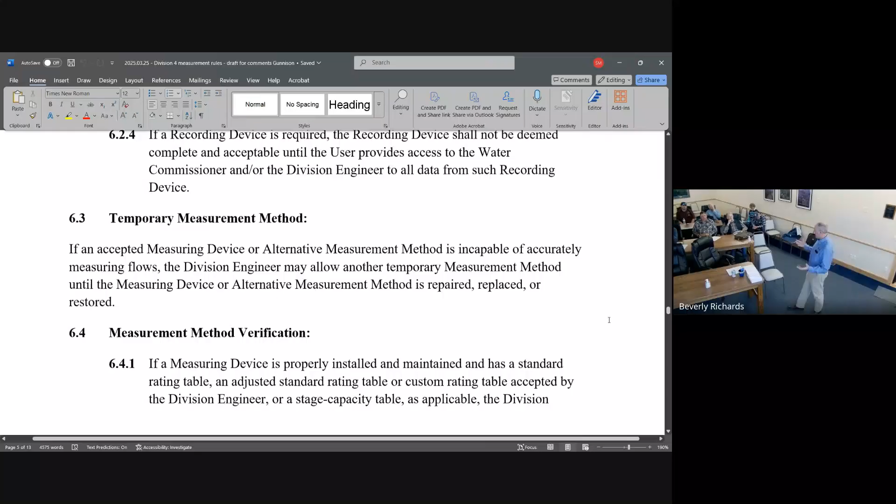Temporary measurement methods: so if your flume washes out or you need a temporary ability to measure, there is a provision in here that would allow the division engineer to allow a temporary measurement method while you repair your flume or get a new one put in.

So the verification - how would we verify the accuracy of your device? The most important one is the first one, 6.4.1. If a measuring device is properly installed and maintained and has a standard rating table, an adjusted standard rating table, or a custom rating table - like a Parshall flume or a ramp flume with a custom table - and a stage capacity table if it's a reservoir volume measurement, the division engineer shall presume that the measuring device is accurate and no verification will be required. So the assumption is that if you've put in a Parshall flume, for instance, and it's level and it's not submerged and there's flow through it, it's calm enough, you can read the staff gauge above it, then that's as accurate as we're going to be going out there to verify it.

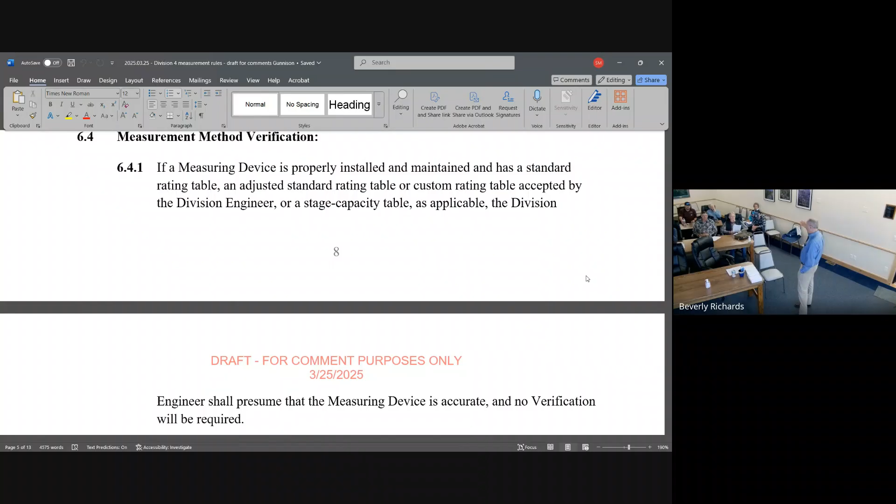So we're going to assume that it is satisfying the measurement. If it's not level or if it's submerged, the water commissioner would probably do one of two things. They'd ask for a hydrographer to go out and measure it and confirm whether or not it's accurate enough within that 5% rating for larger devices. And if it's not, then you may get a notice that you need to install a new one or repair it. Or, if it's really bad, they might just go straight to that - some of them won't need verification, like the one setting off to the side of the stream, those kinds of things.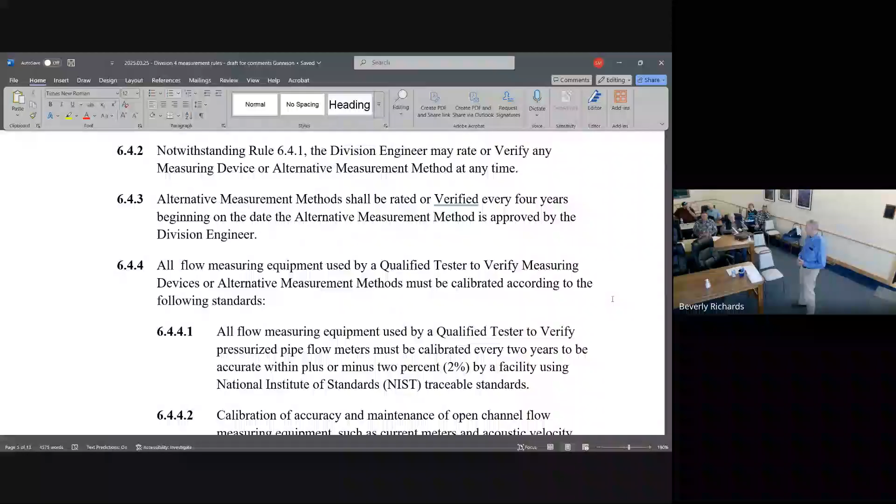But there may be situations where a flume is not performing - maybe there's multiple flumes in a system and the mass balance just isn't working out from what people are taking, where the commissioner could ask for verification to check because it's just not working out and it's causing a problem with administration. So in 6.4.2, the division engineer may rate or verify any measuring device at any time. So it does allow us to do that, but we would avoid that mostly.

So the 6.4.4 and all of the subcategories under 6.4.4 are simply the requirement or standard for the equipment that the hydrographers take out to the stream, or the qualified testers take out to the stream to measure, which includes current meters or cups, spinning cups.

You have a Doppler flow tracker meter, or a Doppler boat is another option, that we use to measure streams. If you're going to use a qualified tester that is not the division, they have to comply with these as well, but we already do. We already calibrate and make sure our devices are calibrated regularly. If you're using somebody else, they need to be using equipment that's accurate. They can't just use something that was calibrated 20 years ago.

Does DWR have any literature or educational materials about the proper way to install a flume? Because sometimes when we've followed up after working with a contractor to put a new flume in, it's not packed right, or the gravel's not right. We've had to have them go back and redo it. Is there something basic we could give people to make sure their flume stays right and doesn't tilt or get erosion underneath?

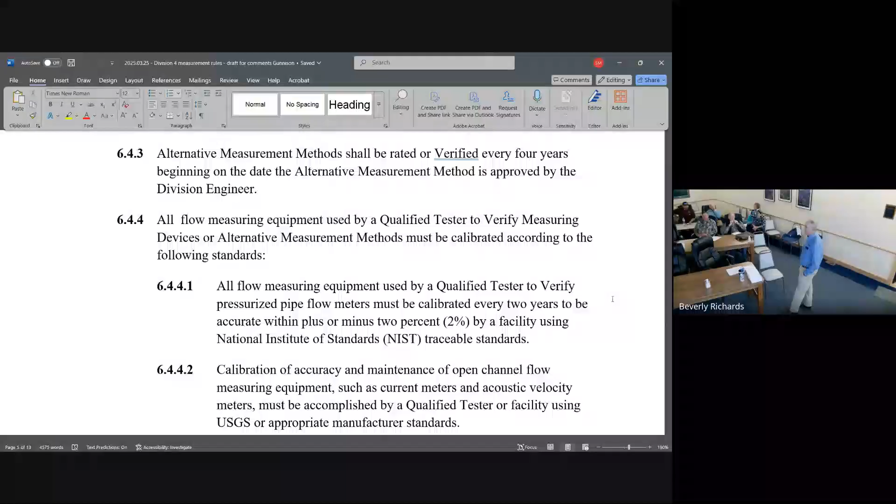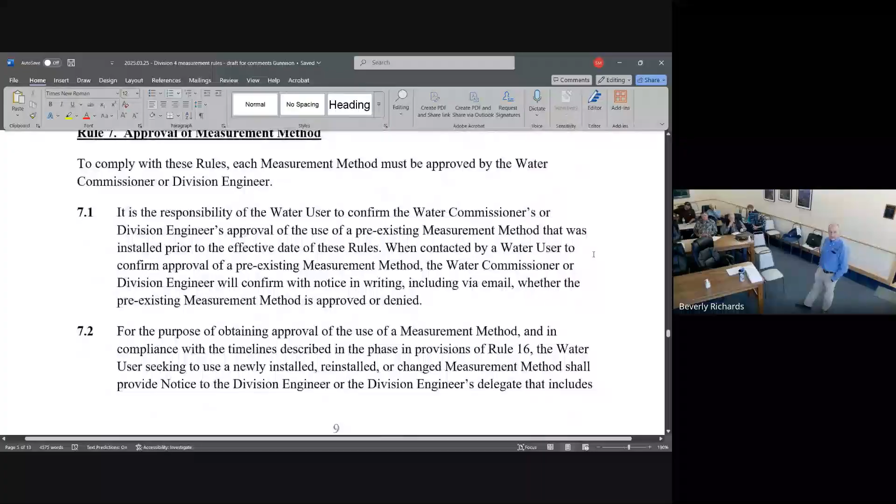So that's the 644. Moving on to Rule 7. Essentially, the approval of a measurement method, the division engineer, we're going to talk about phase-in here later. The office will be doing an inventory of the structures as we phase this in, and the commissioners will be looking at all the structures and defining whether they comply with the rules or not. That may involve some verification, and then we will be notifying users whether they have a compliant structure or not.

The exact method, I think what we've landed on, at least in Division 6, who has rules that were signed last year and are already in this process, is defining it in our database and then having an auto-generated email that goes out once they get to the end of their compliance period. We haven't gotten there yet, but that was the easiest way to do it. So having good email addresses in our system will be important.

But it is technically the responsibility of the user to make sure they comply with the rules. So while that's practically how the process is going to roll out, if you're a user, and we don't have a ton of them here tonight, so spread the word, and you haven't gotten a notice from the division office when you're getting close to that 1, 2, 3, or 4 year period we'll talk about here in a minute, you should contact the division office and say, hey, I've got this flume, I haven't heard whether it's acceptable under the rules, and ask. Because there's 3,000 reservoirs alone in Division 4, 3,115 to be exact, there's thousands of structures, so we are bound to miss one or two.

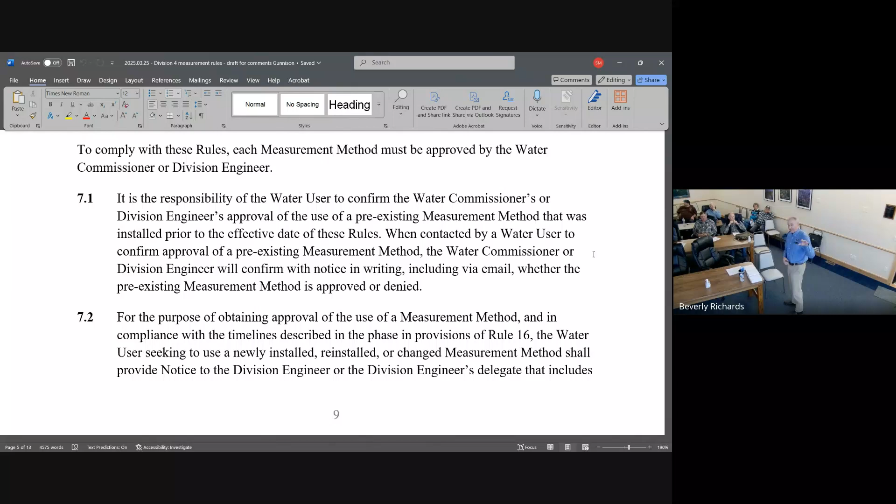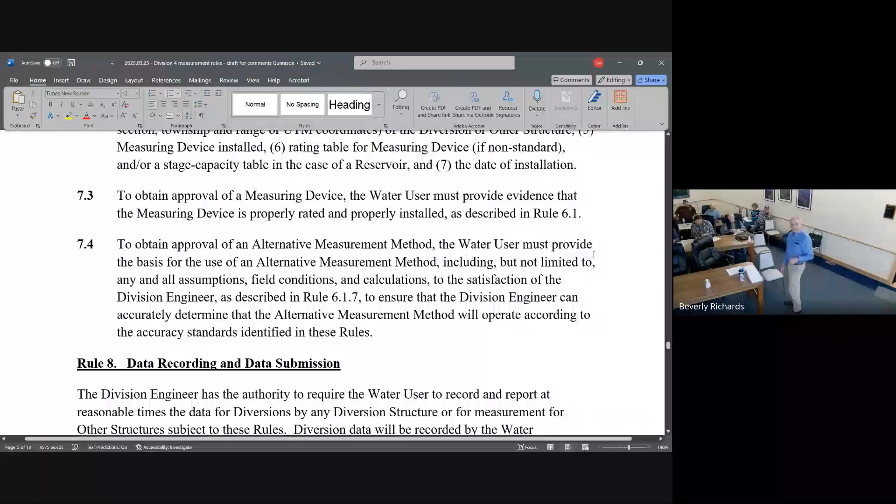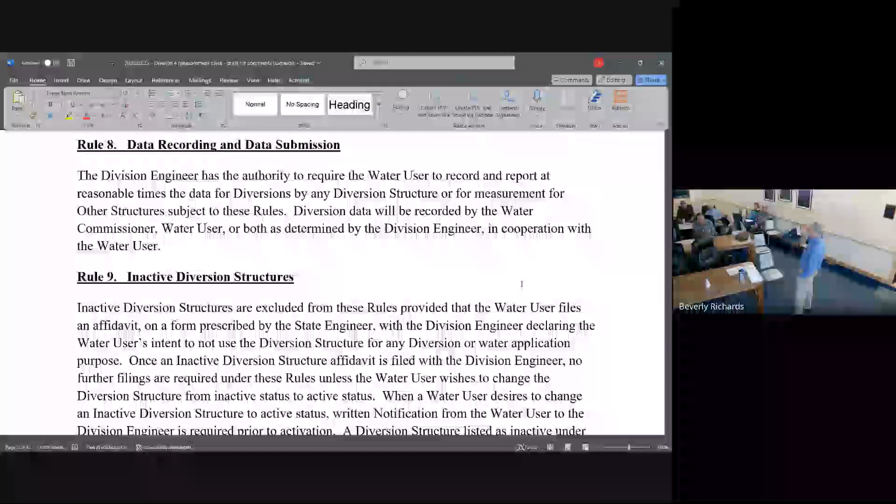I think we can probably go to data recording and submission. This reflects the statutory authorization that the state engineer or division engineer has to require a user to record and report at reasonable times the data for diversions by any structure, and that can include a recording device. Most of our records here in Division 4 are from water commissioner observations right now. But if your commissioner has a gigantic area and only gets to your structure every two weeks, and you want a better record, we'd encourage you to submit a record to the commissioner so they can include it in their diversion record. We're working on ways to make that process easier as well.

Inactive structures in Rule 9 reflects that if a user says, I don't use this thing much anymore and I don't want to spend money on a flume for this structure, you could file to make your structure inactive, and then you won't get a notice that you have a non-compliant structure.

I have thought about that as well. It came up because I noticed there was a time period where we had this proliferation of structures that were being alternate-pointed to another structure. They didn't transfer them because they didn't want to give up that original, but that original structure is really inactive. I've been thinking about that, and it seems to me that's probably going to be the biggest percentage of these inactives, if I've got this correct. If you have a water right that's being taken at this alternate point for 40 years, legally it should be okay to say that this is inactive, I should think.

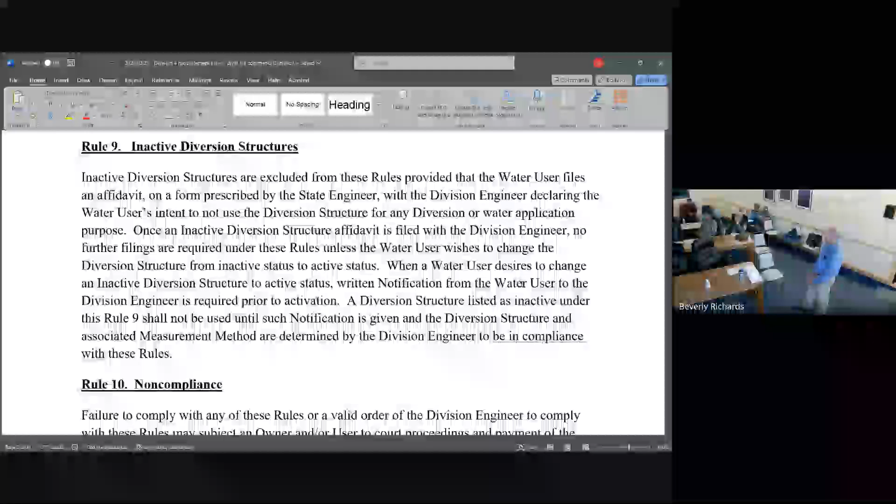I have to consult with my counsel, the attorney. But I needed to bring that up because we talked about it yesterday, and I apologize, but I've been thinking about it. That's going to turn out to be a significant number of structures if what I'm saying comports to this.

Yeah, I think that's absolutely right, Bob. Those structures won't get that right, won't get abandoned, correct, the right's not abandoned. But the practical reality is that they've been diverting since they got their decree in 1981 for this alternate point from here. And there's ditches where you get return flow off your neighbor, so you use your right for just a little bit, and then when he turns on, you don't need all that water.

This statement has made a lot of people nervous in the other divisions about abandonment. I think the form we've been using for Division 6 has a statement saying this form in itself is not any demonstration of intent to abandon the water right. Now, is there still going to be the fundamental question of whether you haven't used this point of diversion for 40 years and have you abandoned this water right? Yes, but the measurement rules in this inactivation form aren't going to further that one way or another.

Or that's the idea. That would be the case regardless of whether you haven't taken water. But in the situation Bob mentioned, that wouldn't be cause to abandon the water right because you're taking the water right at other locations, by decree, actually.

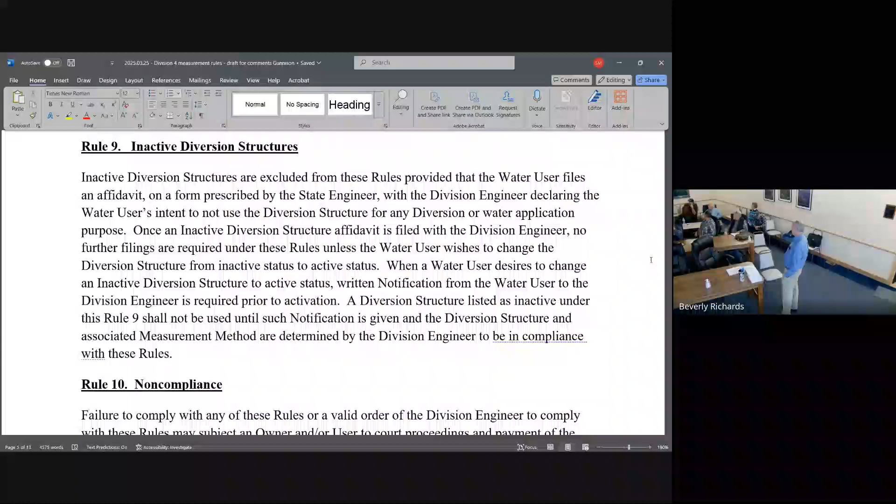So we're getting close to the end here, hopefully you had dinner before or you're close to home. But Rule 10 on non-compliance is what's going to happen if people don't comply.

There's a couple of different things. If you get to the end of the compliance period and you don't have a device, and we've notified you that your device isn't compliant, we could potentially send an order similar to what we would have done before. Or the rules specifically say the division engineer may also order the water user to curtail all diversions by a diversion structure until the water user is in compliance with the rules. So it somewhat reflects what we already have authorization to do in statute, but it makes it clear to everybody in Division 4 what the standard is.

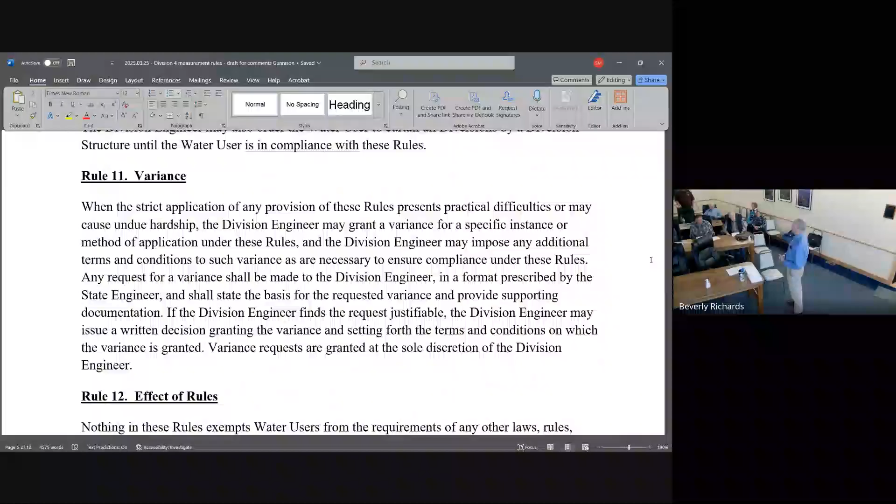Variances - so for people who have difficulty, whose physical situation of their structure, or administrative situation surrounding their structure, makes it difficult to comply with the rules, as written, can apply for a variance through the division engineer's office to do something different. The division engineer would have the discretion to either approve that or deny it.

So there's a process to appeal the decision - I don't think I need to read that. If a decision is made under the rules, say we notify you that your structure is not compliant and you don't agree, there is a process: first you go to your division engineer, then you could appeal that decision if you don't agree.

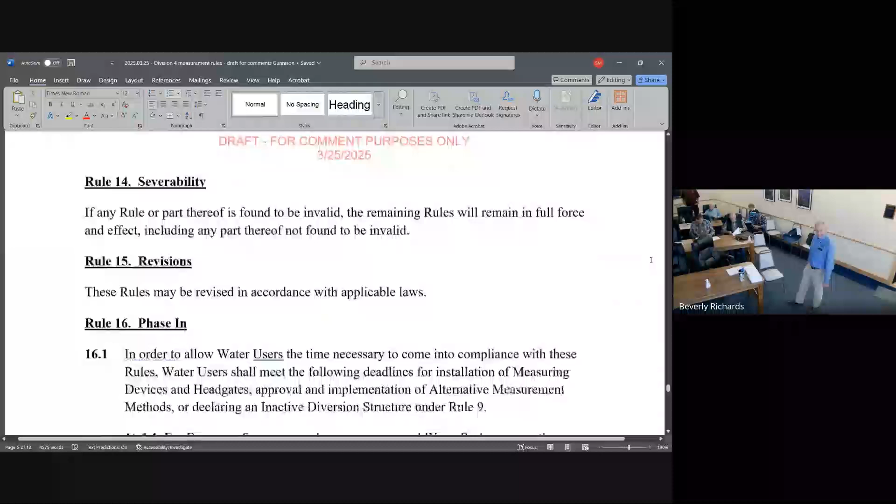Severability, legal language, revisions - okay, so phase-in is the last important component. These phase-in timelines are similar to the ones we've used in other divisions, but they're a little different. This is where the rules differ in some way, just because of the physical reality of our staffing and the reality of how the basin is situated. And in Division 4...

What we've chosen to do for phase-in for direct flow water rights - these timelines are the same as Division 6. For direct flow water rights with a capacity greater than or equal to 5 CFS, the deadline for compliance is 12 months after the effective date of the rules. That effective date is after we file, after it gets through the court process and is signed by the judge, and could be that signing date or some later date that we define. For diversions with less than 5 CFS capacity, the deadline is 18 months, so you get an extra 6 months. For diversions with less than 2 CFS, the deadline is 2 years, so 24 months.

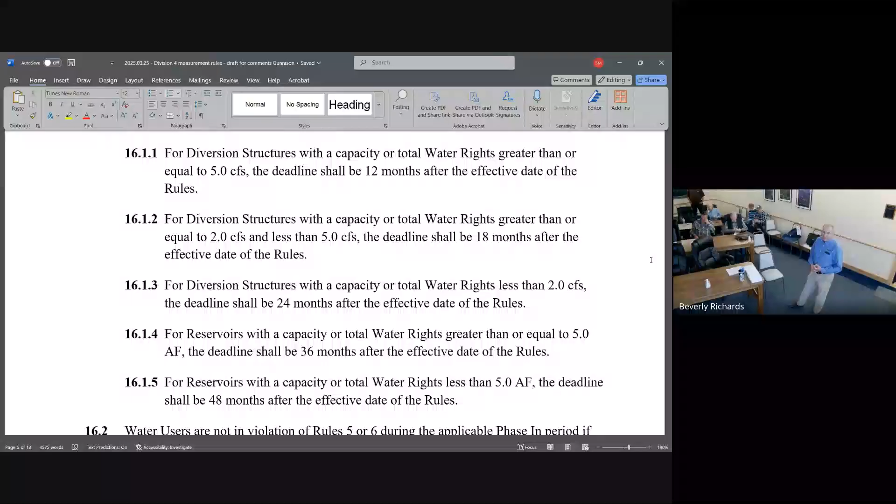Now here's the difference between Division 4 and Division 6 and 7: for reservoirs with a capacity or total water rights greater than or equal to 5 acre feet, the deadline is 36 months, so 3 years. That was, in consultation with Bob and Division 4 staff, given the number of reservoirs - there's just a significant number of small reservoirs in Division 4, so much research to do to get our arms around that. We had to make a prioritization for those with a longer period. And then smaller reservoirs, less than 5 acre feet, is 48 months, so a full 4 years after the effective date of the rules, recognizing the difficulty of doing the inventory and getting the notices out.

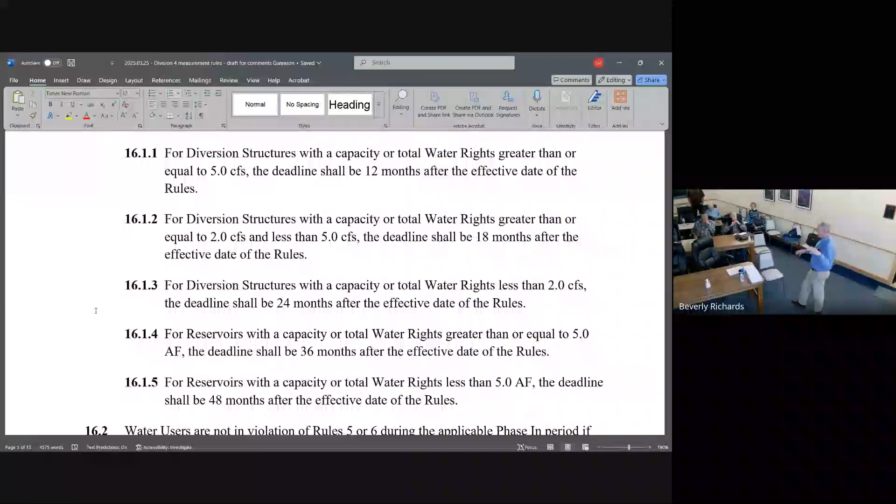Division 7's was different. We did it in 2 areas, non-critical and critical, because half of their division is over-appropriated and half is not. So it was easy to split and do a 4-year timeline for the non-critical areas and a 2-year max timeline for the critical areas. This seemed to make more sense in Division 4.

So I think that's it, because Rule 17 is just signatures, right? Effective date and the signature. So what questions might you have? Comments? If you need to think about it, please feel free to comment through the form.